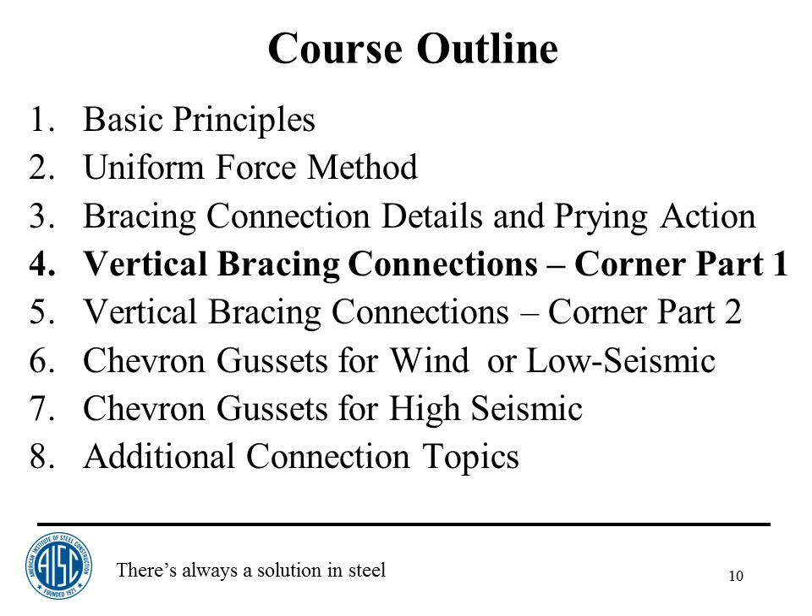So this is just the title, Bracing Connections and Related Topics. That's the title of the webinar. We're item 4 here, Vertical Bracing Connections, Corner Connections, Part 1, and tonight we'll do a vertical bracing connection in detail.

We'll begin with the brace to gusset design. This will determine the gusset dimensions based on the brace to gusset connection. Then we'll check the gusset to column connection, then the gusset to beam connection, and then the beam to column connection. So every one of these connections has got 4 separate connections that you need to deal with: brace to gusset, gusset to column, gusset to beam, and beam to column.

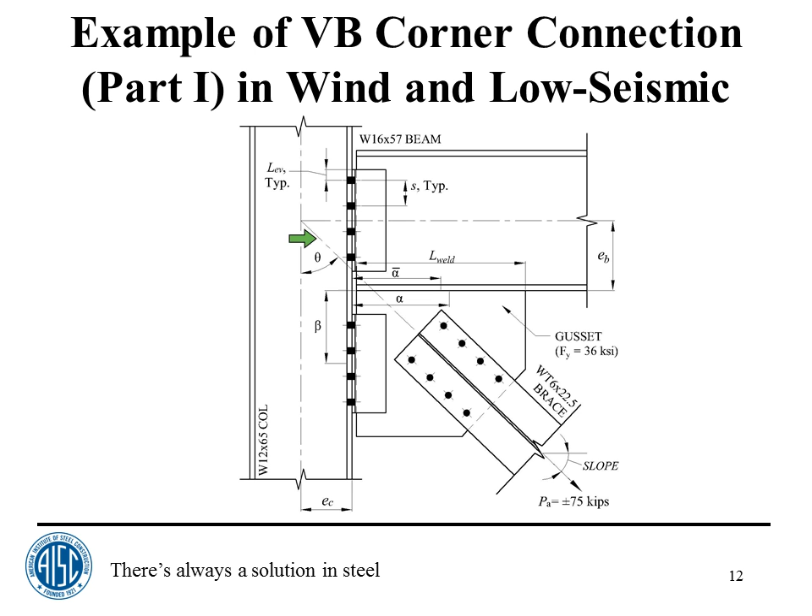Many of the limit states associated with these 4 connections are repeated. All of the limit states will be considered in this presentation, at least in the handout that you have, but we will not go through them all in detail because there's just not enough time in an hour and a half to really get through every one of them. You'll see the way we'll handle that as we go on.

This example you've seen before. I don't know whether it was the last session or the session before. We used it to do some calculations of the forces for the uniform force method. But this is the basic information. It's AISC 14th edition manual and specification. The example will be done in ASD terms. Next week we'll be doing an LRFD.

The beam to column and gusset to column connection have 4 rows of bolts, that's N equals 4. The weld length is prescribed, that's the horizontal weld length between the gusset and the beam, to be 20 inches with a 1/4 inch minimum. The bolts are A325N, threads excluded, standard holes, 3/4 inch diameter, unless noted otherwise. The angles, double angles, 4x4x3/8, grade 36, with horizontal short slots in the outstanding legs. And the edge distance, L sub EV, on the angles is 1 1/4 inches.

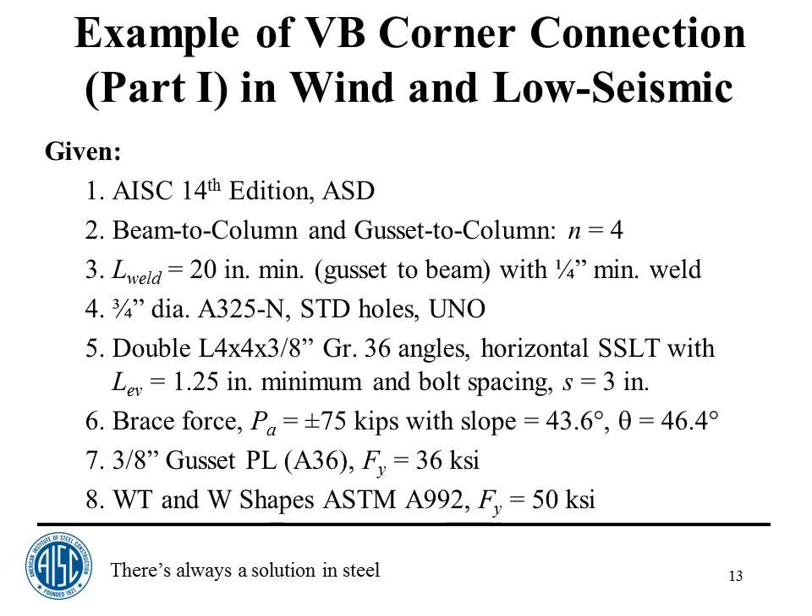The bolt spacing is 3 inches. The brace force is specified as plus or minus 75 kips. The slope is 43.6 degrees. The angle from the vertical used for the uniform force method is 46.4 degrees. The gusset is a 3/8 inch A36 plate, and the WT and W shapes, the column and the beam, are all ASTM A992 grade 50. So let's continue.

Each part of the connection that we deal with will be highlighted in yellow, as you see here. We'll begin the example by designing the brace to gusset connection. This will help to set the geometry of the gusset.

Determine the number of bolts required to attach the brace to the gusset. Check gross and net tension and block shear for the brace. Check bolt bearing and tear out of the brace and gusset. Check block shear and Whitmore tension and buckling for the gusset.

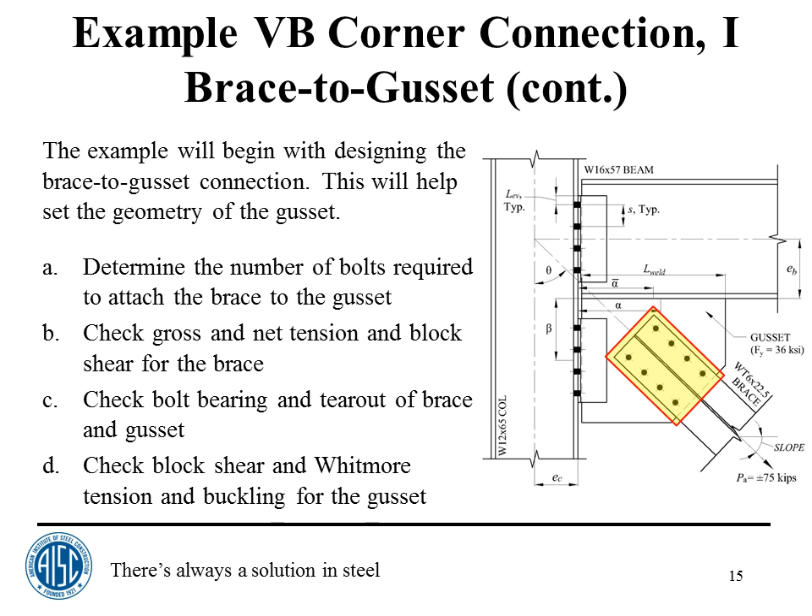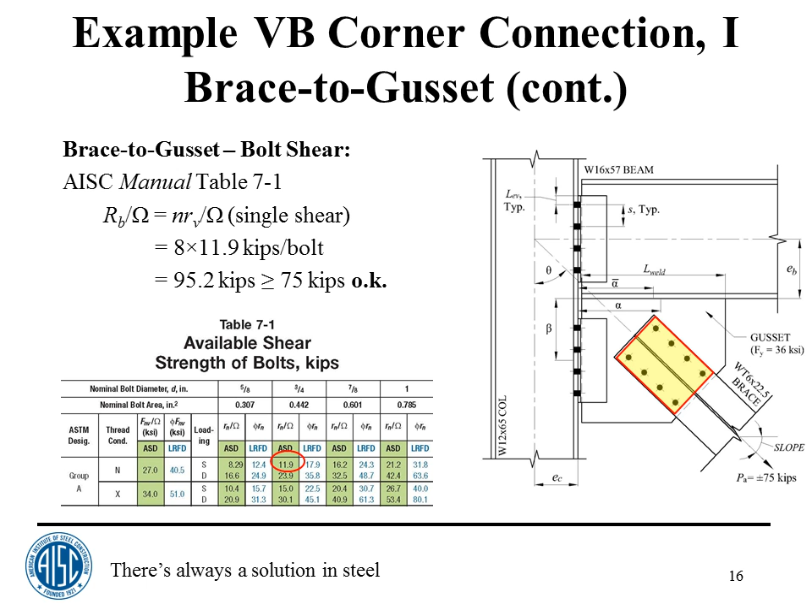Starting off with bolt shear, just to get an idea of where we are. The bolts are A325, 3/4 diameter, with a single shear value, ASD, of 11.9, as shown in Table 7-1. We have 8 of them, so 8 times 11.9 gives me 95.2 kips, greater than 75 kips, so we're okay. The connection will probably look like what we see here, though it might change a little in some cases. If tear out or block shear was an issue, you might have to space the bolts out more than the 3-inch spacing specified for this problem.

Brace to gusset. One of the first things usually checked is the gross tension of the WT 6x22.5. This really isn't the connection designer's responsibility, maybe, but I think it is, because if the brace is no good, then everything else we're doing is just spinning our wheels.

So let's check the WT gross tension, which is the tension area. The gross area is 6.56 square inches, the yield strength is 50, and the safety factor is 1.67, giving me 196 kips, greater than 75.

Okay, the next check would be net tension. Sometimes engineers pick these members without paying attention to how they're going to be connected. You're going to have some holes in this thing, which reduces the tensile strength, and there are also shear lag effects, because not all elements of this WT will be connected—the stem will be sticking up in the air with no connection to it. The width of the holes is taken as 1/16 greater than the nominal dimension for these net tension calculations.

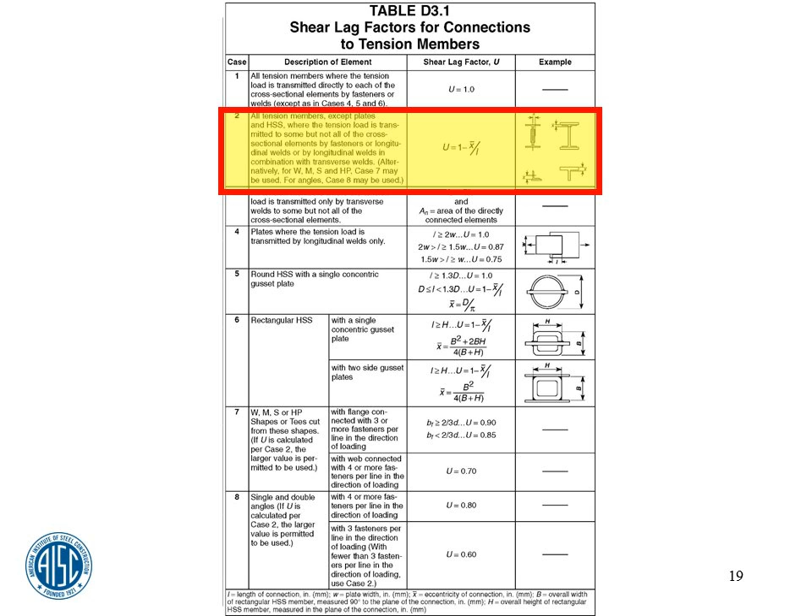The shear lag factor is from Table D3.1. We're looking at case 2 here: all tension members except plates and HSS, etc., where the load is transmitted to some but not all of the cross section.

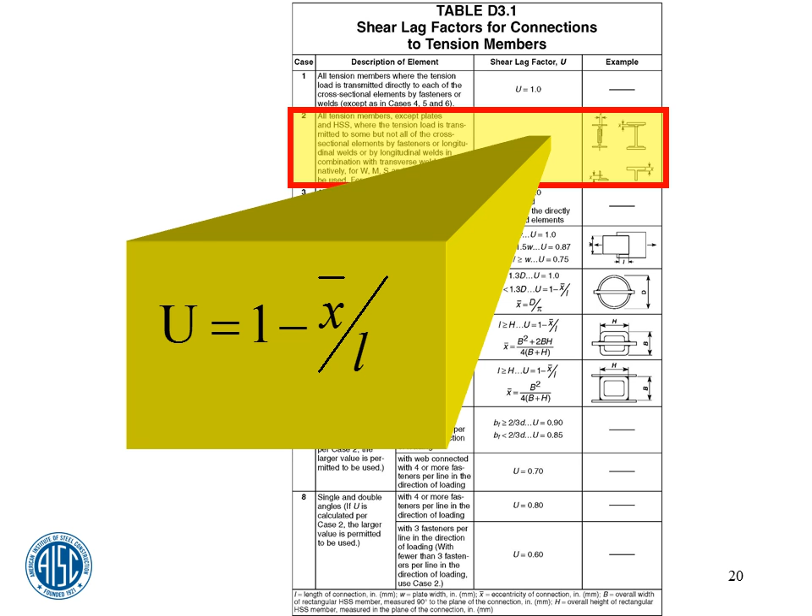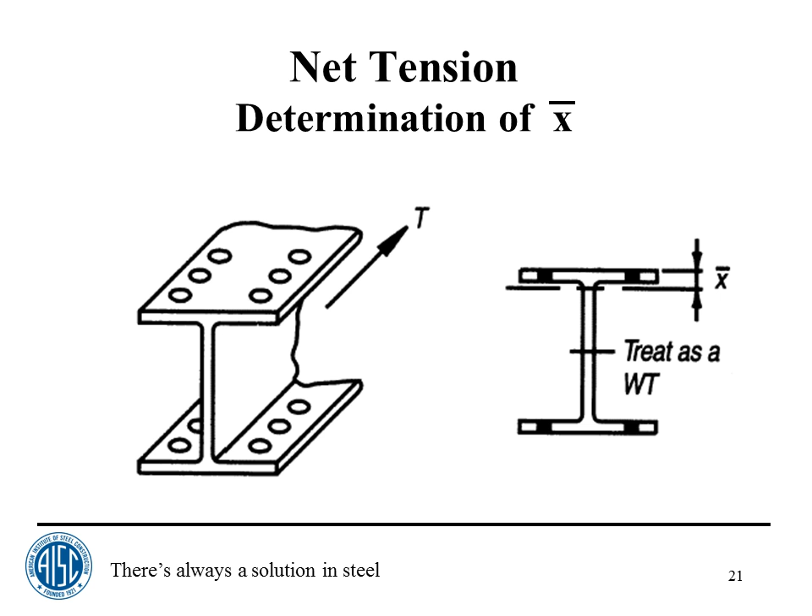The formula we have for this is shear lag factor U equals 1 minus x bar over L. What are those terms? X bar is the distance from the faying surface—here, for our connection—to the gravity axis of the brace. If you have a wide flange connected to the flanges and not the web, x bar would be the gravity axis position of a WT cut from that wide flange, which is exactly what we have here. So we can look this number up in the tables in Part 1 of the manual, and x bar is 1.13.

The length of the connection out to out of the bolts is 9 inches. So U equals 1 minus x bar over L, which is 1 minus 1.13 inches over 9 inches, giving me 0.874.

To simplify the calculations, instead of repeating a whole diameter plus 1/16 all over the place, in a lot of the calcs what you'll see is 13/16 plus 1/16 gives 7/8. The section we're looking at is shown here by the red line—what happens right along this section of the WT where the holes are.

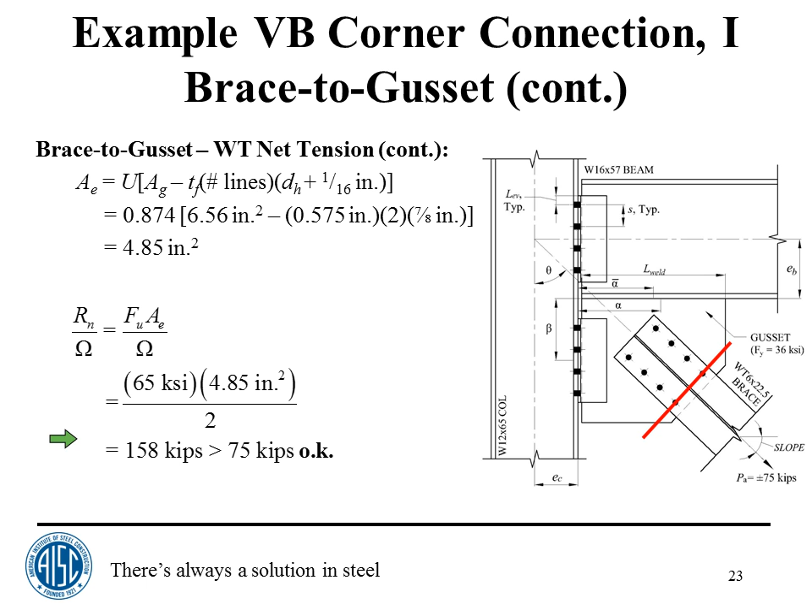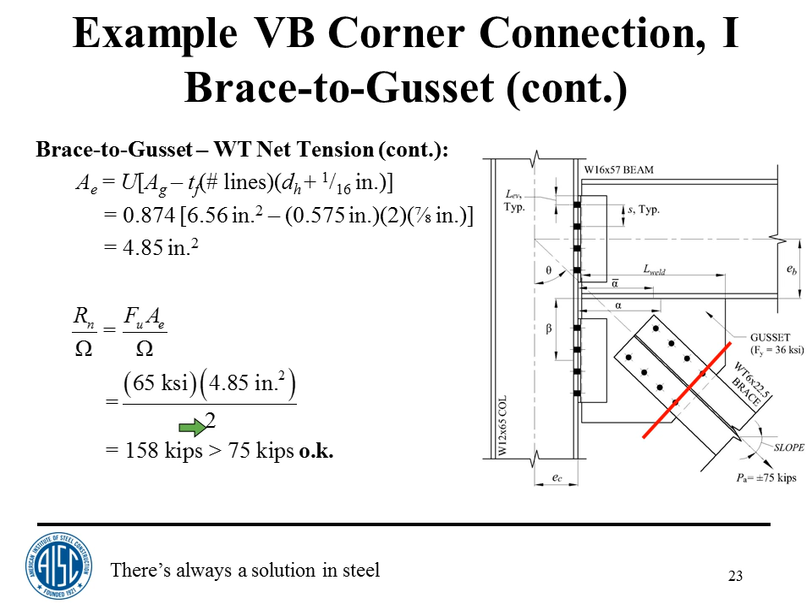So the effective net area, A sub E, is the shear lag factor times the net area. The net area is the gross area minus the area of the holes. The thickness of the flange of the WT is 0.575, there are two holes, and the size of the hole is 7/8. Subtracting that out from the gross area gives an effective net area using the U factor of 4.85. So the tensile strength, F sub U times A sub E—the rupture or fracture strength—65 times the effective net area divided by the safety factor of 2 gives me 158, greater than 75.

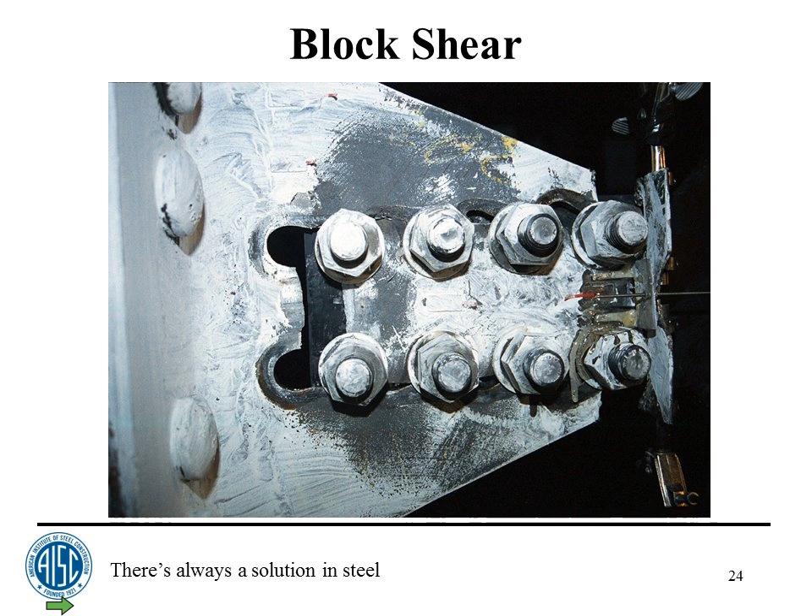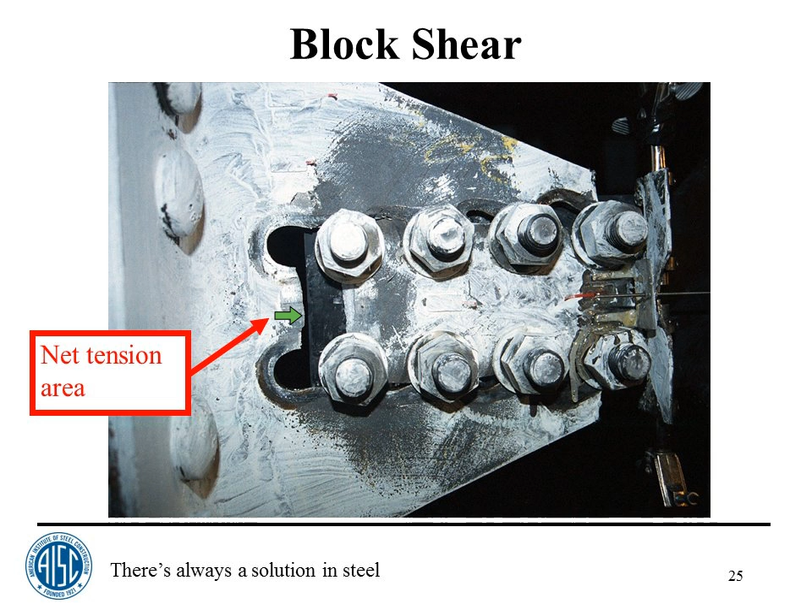Okay, the next set of slides has to do with block shear. This picture shows a pretty graphic block shear failure. There are two failure surfaces for block shear: you've got the net tension area between the bolts in tension, and you've got a shear area along the bolts—there are two of them, one up here and one down here.

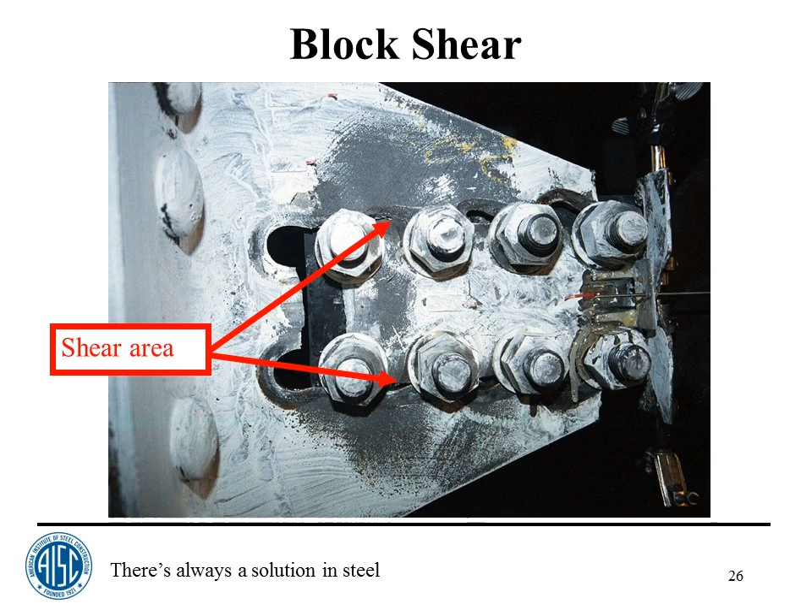The UBS factor is a factor that you can find in the spec. Basically, it's 1 for everything we'll be doing here tonight. The commentary and the spec says it's 0.5 if you had, say, a double column of bolts like a clip angle with two columns of bolts. Something like that would be 0.5, but it'll be 1 for everything we're doing.

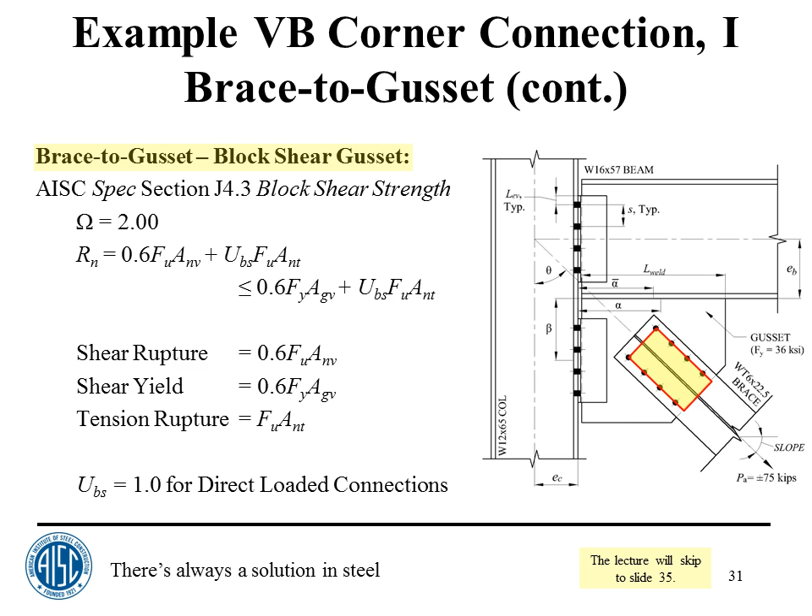All the calculations are given here, but the lecture will skip to slide 35. The reason we're skipping that is we don't have time to go through it all again, and there's nothing new. All of the calcs that we just skipped, you can look at yourself and see that they're exactly the same as what we already did for block shear for the WT. The failure mode is a little bit different, but it's basically the same idea.

The next thing that I want to talk about is bolt tear out and bolt bearing. And these, although they're listed in the specification as bearing, they're really quite different limit states. I believe that in the next edition of the specification, they will be broken out to be tear out and bearing as separate entities.

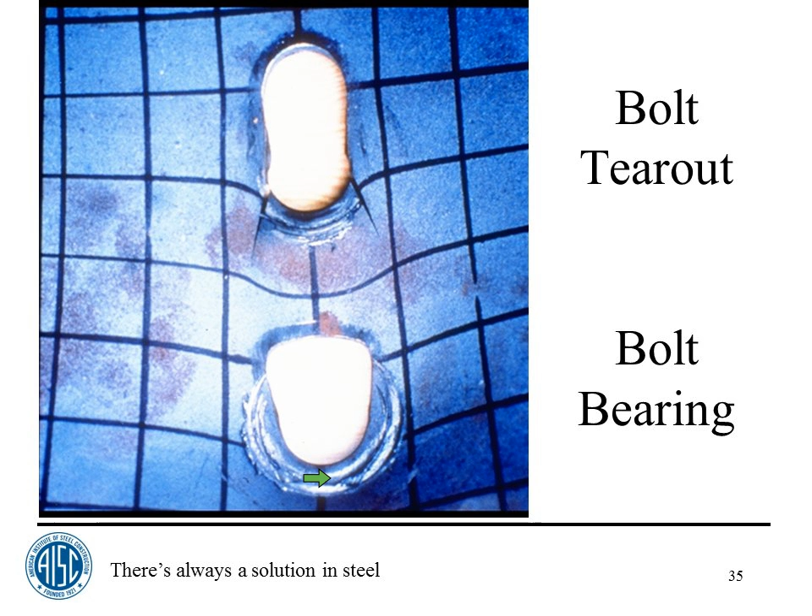You can see for tear out, you kind of get some sort of a rupture or fracture taking place, whereas for bearing, you get kind of a mud wave in front of the bolt. You get a lot of yielding. Here you're getting something that's going to ultimately fracture. It's going to pull a piece out.

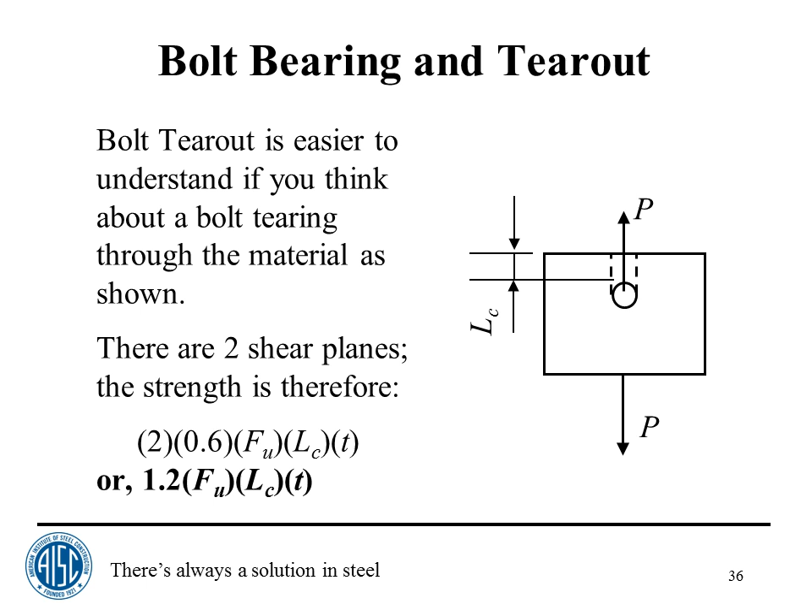Continuing, in reality, the tests that were done to establish this formula, some of the tests failed like you see here, but the formula in the specification, it says here - it's actually in the specification itself - is pretty accurately predicted by the 1.2 formula.

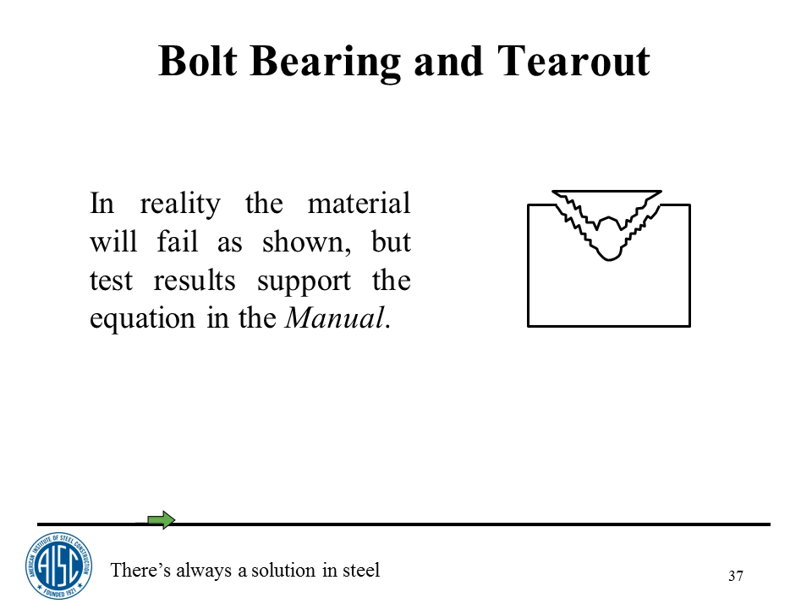So we already checked bolt shear, 11.9 kips per bolt. We had 8 bolts, and we came up with about 95.2 kips capacity. But that might not be the right number, because bolt shear is only one of 5 limit states that need to be checked for each bolt.

And those limit states are bolt shear, which we already checked, then bolt bearing on the main material, bolt bearing on the connection material, bolt tear out on the main material, and bolt tear out on the connection material. And then for each bolt, the smallest of these 5 is added up to get the capacity of the connection, the design strength of the connection.

So let's look at how this works. For bolt shear, we've already done that. We know that for bolt shear, it's 11.9 kips per bolt. So let's look at bolt bearing.

This is for the main material, for the WT. It's 2.4 times the diameter of the bolt times the thickness of the flange times F sub U, 65, divided by the safety factor 2, gives me 33.6.

Then bolt tear out for an edge. The edge is this one right here. This is L sub C, the clear distance from the center of a hole - from the edge of the hole to the edge of the plate. So it's 1.5, that's the edge distance, minus half of a hole diameter. And for this calculation, we don't use the hole diameter plus a 16th. The actual physical tests were done with, and the theory was presented with, the hole diameter, so it's 13/16.

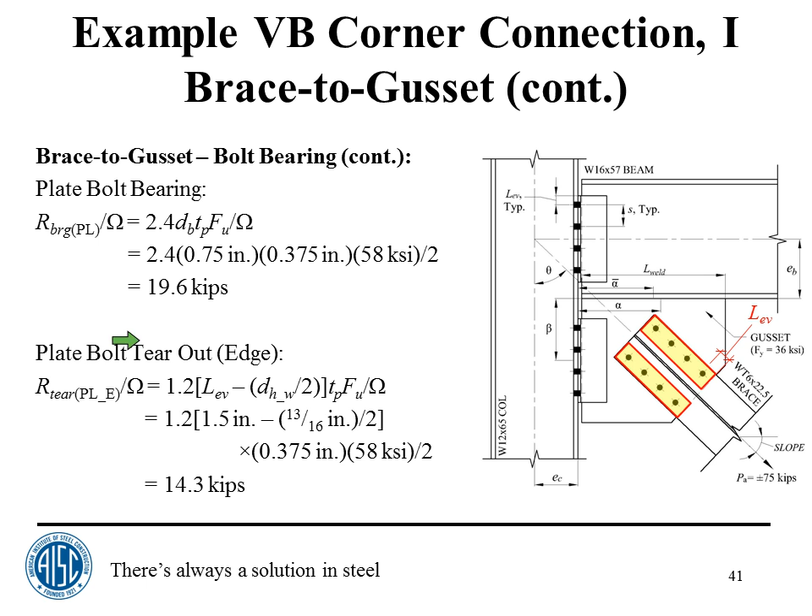Then plate bolt tear out for an edge bolt. That's this one down here. We have, again, 1.5 minus half a hole, 13/16 over 2. And then we'd have the thickness of the gusset. We'd have 58, the tensile strength of the gusset. Safety factor, 2, gives me 14.3.

Now, none of these yet have gotten down to 11.9, so we're still okay.

Continuing, plate tear out. This is the gusset plate. So the center bolts, like in here somewhere, we would have 3 minus 1 hole, gives me 28.6.

And then for the top bolt, for each bolt we would now summarize the 5 values that we have. We've got all these bearings and tear outs: bearing on the main material, tear out on the main material, bearing on the connection material, tear out on the connection material, and bolt shear. Well, it turns out, in this case, it's 11.9, which is where we started.

And then for each of the other bolts, this is for the center bolts, calculating, taking the minimum of the 5 values - again, the least is going to be 11.9. And then for the bottom bolt, taking the least of all these values, again, it's 11.9. And so you would end up, of course, with where we started: 11.9 is the value, but it might not be that way.

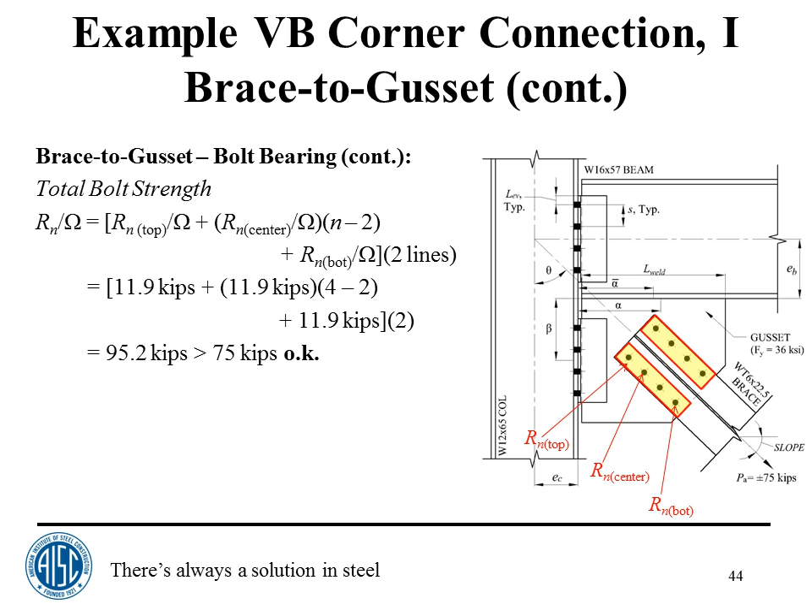You've got bolt bearing for the main and the connection. You've got bolt tear outs for the main and the connection, and for tear out, you've got different values depending upon center bolts or edge bolts, and then you've got bolt shear. The least value of those 5 for each bolt, added up, gives you the capacity of the connection. This particular example doesn't demonstrate that, but that's what you have to do in general.

The next set of slides has got to do with the Whitmore section. The Whitmore section was first introduced in the bolt guide, which the bolt that I mentioned, I think 2 sessions back, by Kulak, Fisher, and Struik, first published in 1974.

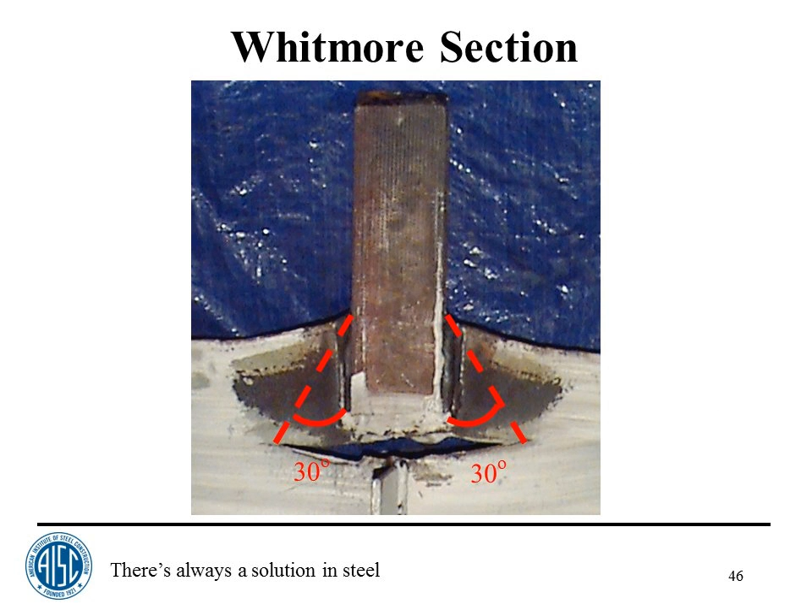The Whitmore section was actually developed at the University of Tennessee in 1952. It wasn't used, as far as I know, at all until the bolt guide book came out in '74, and its second edition in '87.

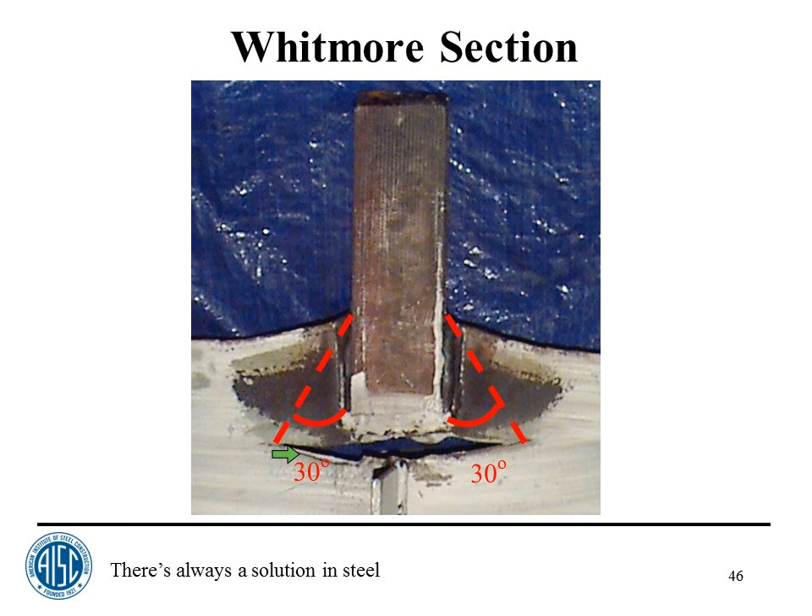Anyway, what Whitmore came up with was that from the beginning of a connection to the end of a connection, if you spread the load at 30 degrees each side, you get pretty darn close to calculating what the stress is on a section of your plate. This one went to the limit, it fractured, but you can see that it's pretty darn close to being 30 degrees each way.

The length of the Whitmore is the gauge, which is 5.5, plus the tangent of 30, times 9. 9 is the distance out to out of the bolt. And there's two of those, which gives me 15.9 inches for the Whitmore section, the length of the Whitmore section. Sometimes the Whitmore section will go into the beam. In this case, it does not.

There's a general discussion of the Whitmore section in Modern Steel Construction, written by Carlo Lini of AISC and myself, published I think in about 2012, which gives you all of the kind of details that you need to consider it in general.

So, in this particular case, the length of the Whitmore is in the gusset, it's 15.9. The buckling factor, the K factor, is 0.5 from tests that were done by John Gross at NIST. It's the value that's used in all the AISC's design examples in Volume 14.1.

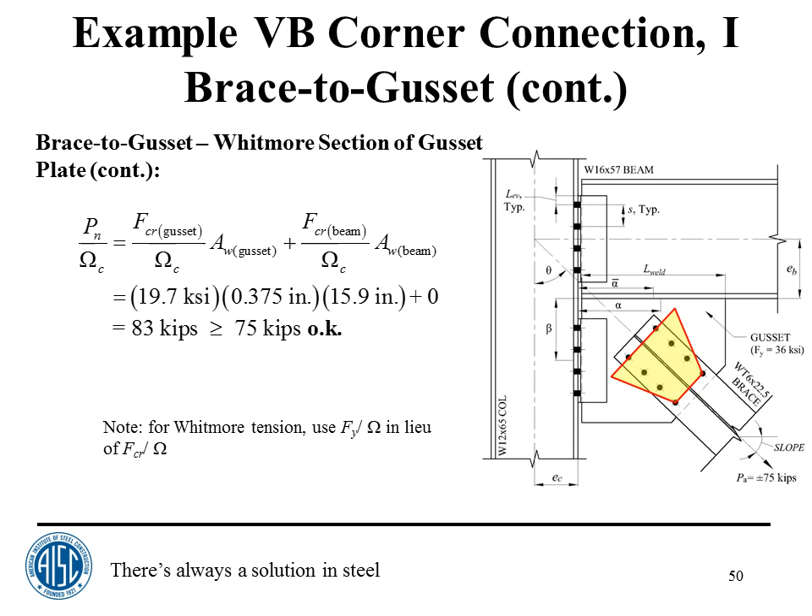You could also check Whitmore tension, but for Whitmore tension, this 19.7 will be about 21.6. So it's not going to control. I don't think it ever controls, but if you have a connection where KL over R is less than 25, basically you would just be checking yield anyway.

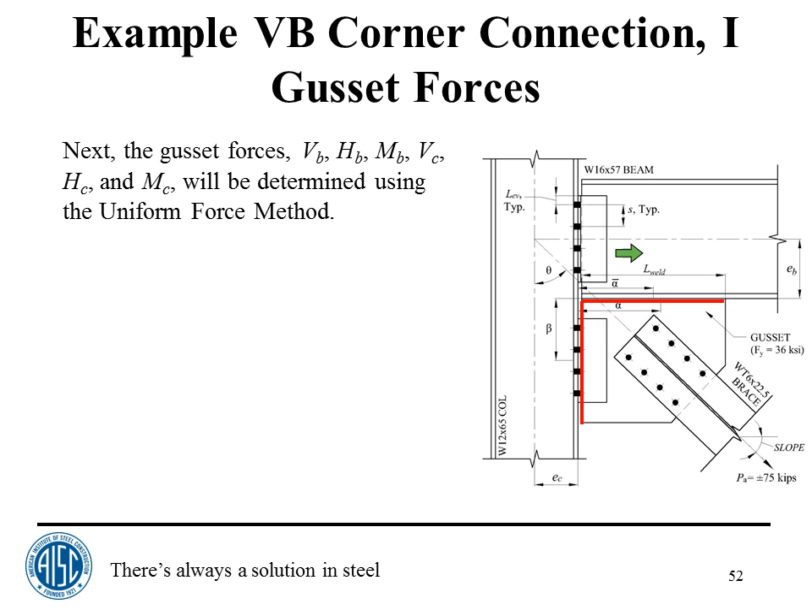All right, the next part of this presentation is to calculate the forces that act on the gusset interfaces, which are shown here in red - gusset to beam, gusset to column. We'll use the uniform force method to do this. We've already done this in an earlier presentation.

Alpha is the distance from the face of the column flange to the ideal centroid of the gusset to beam connection. Ideal in the sense that if we put the centroid of the connection right there, we'll have no couple on this edge. Beta is the counterpart for the gusset to column connection.

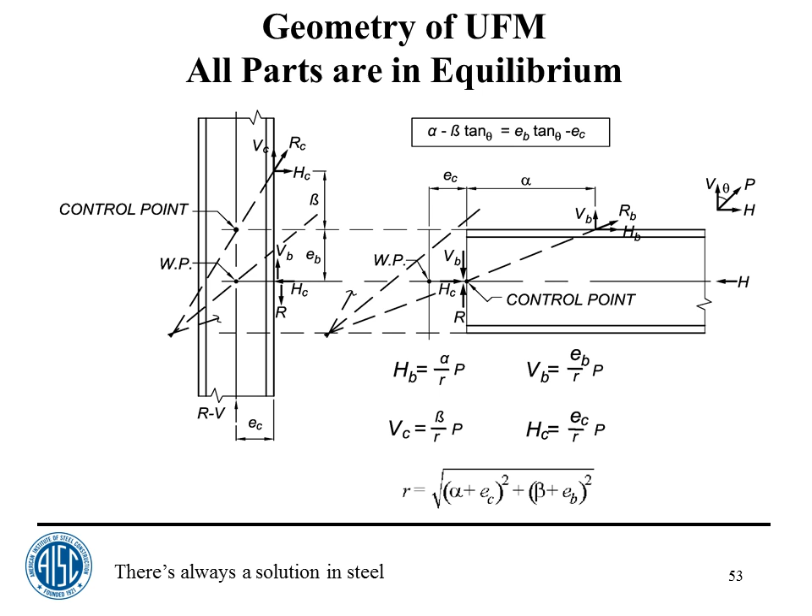Beta is the distance from the top flange of the beam in this case - could be the bottom flange if it was a bottom gusset - to the centroid of the ideal position of the gusset to column connection. Ideal in the sense that if we satisfy this constraint with alpha and beta, there are no couples here either, no couples at the gusset to beam connection, and no couples at the beam to column connection. So you have pure uniform forces on every interface.

Continuing with the UFM, the tangent of the angle theta from the vertical is the tangent of 46.4, which is 1.05. E sub B is half the depth of the beam, which is 8.2. E sub C is half the depth of the column, 6.05. Note that E sub C would be 0 in connections into a column web, except for special case 4, which was introduced a couple of sessions ago.

So let's continue with it. Beta bar - what's the difference between beta and beta bar? There have been some questions about this sort of thing. Beta bar is the actual distance to the centroid of the gusset to column connection.

From the geometric layout, the horizontal dimension - actually it's the vertical dimension of the gusset - is 16 7/8 inches. That's this distance right here, from here to there. And we will place the gusset to column connection right dead center on that. So we'll pick beta bar as 8.5 inches. Beta bar is 8.5 inches. That's the centroid of the connection of the gusset to the column. Let's also pick beta, the ideal location, to be exactly beta bar.

Then, using the constraint, we can calculate the ideal position for alpha. And that turns out to be, from the geometry here, 11.5 inches.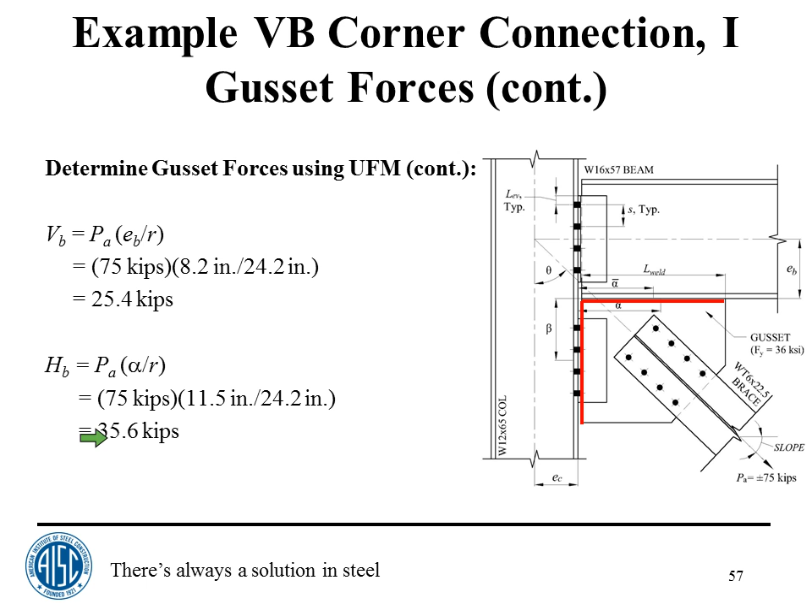The shear between the gusset and the beam is 35.6. You have to remember what all these definitions were—I don't have time to go through the whole thing again. M sub B is the moment on the horizontal edge, and here you see V sub B and H sub B. V sub B times the difference between alpha and alpha bar, which is 1 inch, gives me a couple of 25.4 kip-inches. V sub C, the vertical component between gusset and column, is 26.3.

And H sub C, the horizontal component between gusset and column, is 18.8. There's a note that H sub C would be 0 for connections to a column web, except for special case 4. Why is that? Because for a column web, E sub C would be 0, and so H sub C would be 0, except for this special case. M sub C—in this case there could be a couple on this edge if alpha, beta, and beta bar were not the same, just like we have here, calculated by taking H sub C times the difference between beta and beta bar, just as we did with V sub B and alpha bar. This is the normal component to this surface, and H sub C is the normal component to this surface. So it would be H sub C times the quantity beta minus beta bar, if beta wasn't equal to beta bar. So I could have couples on both edges.

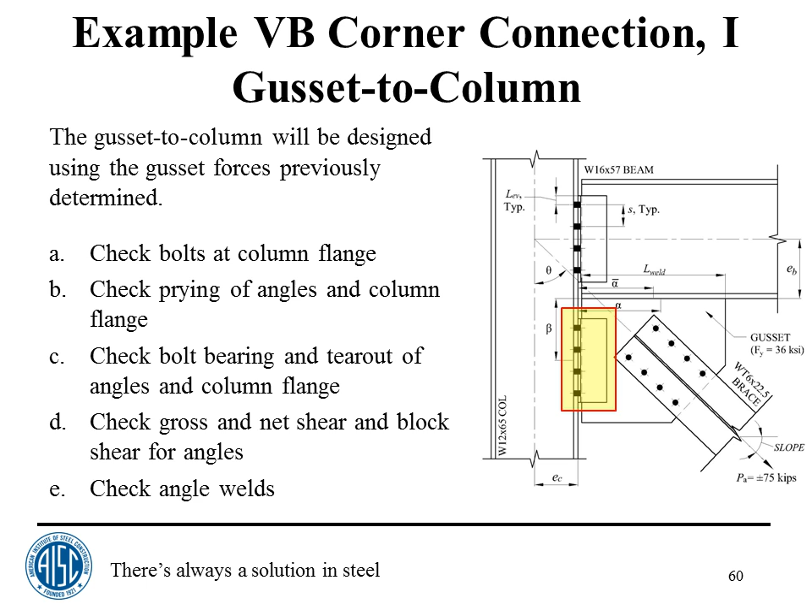Continuing, we'll look at the bolts here. Remember, the bolts had a bolt shear capacity, a design strength of 11.9, and there are 8 of them. So again, we have 95.2, greater than the vertical component we're dealing with, gusset to column, 26.3.

The thing that's different here is that we've got both shear and tension on these bolts, as we did last week in the prying action formulation, and that's why I did that. The most interesting case is really where you've got shear and tension on these bolts.

So what's the shear per bolt? Called V sub bolt, it's the total shear divided by the number of bolts—that's 3.29. What's the total tension per bolt? The required strength in tension per bolt is H sub C, the total tension divided by the number of bolts, which is 2.35.

The area of a bolt, 3/4 diameter, is 0.442. Therefore the shear stress per bolt we need for the interaction equation, little f sub RV, is the shear per bolt divided by the area of the bolt, which gives 7.44 KSI. The next slide will show the interaction equation, which you saw last time in some detail.

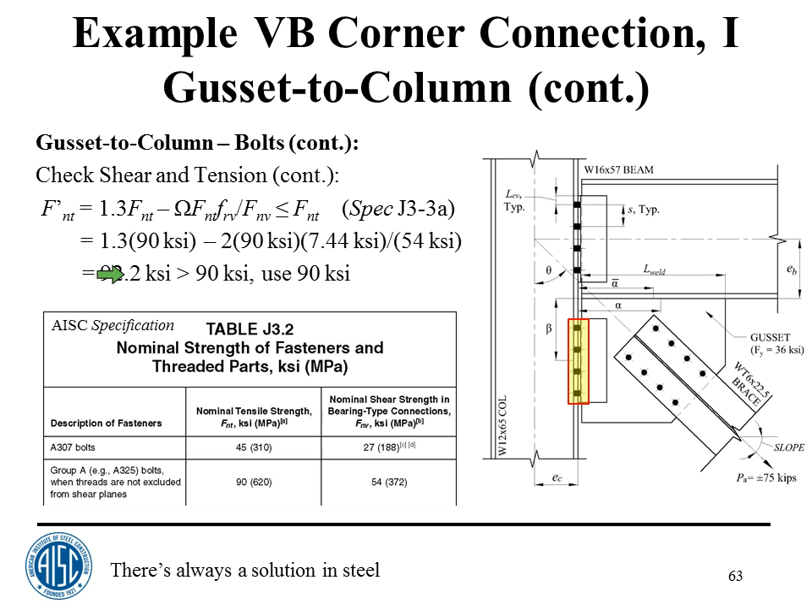If you calculate all of this, you come out with F prime NT equal to 92.2, which is greater than 90, which is impossible. We can't exceed 90, so we use 90. I mean, it's possible for it to exceed, but for design purposes we can't use more than 90. All this really means is that the shear stress on the bolt is so small that really it doesn't affect the tensile strength interaction-wise.

So what's the reduced tensile strength of the bolt? It's F prime sub NT times the area of the bolt divided by the safety factor. That reduced tensile strength wasn't reduced at all. It was 90. So we're right back to the 19.9 that we had before, greater than 2.35, we're okay for the bolt.

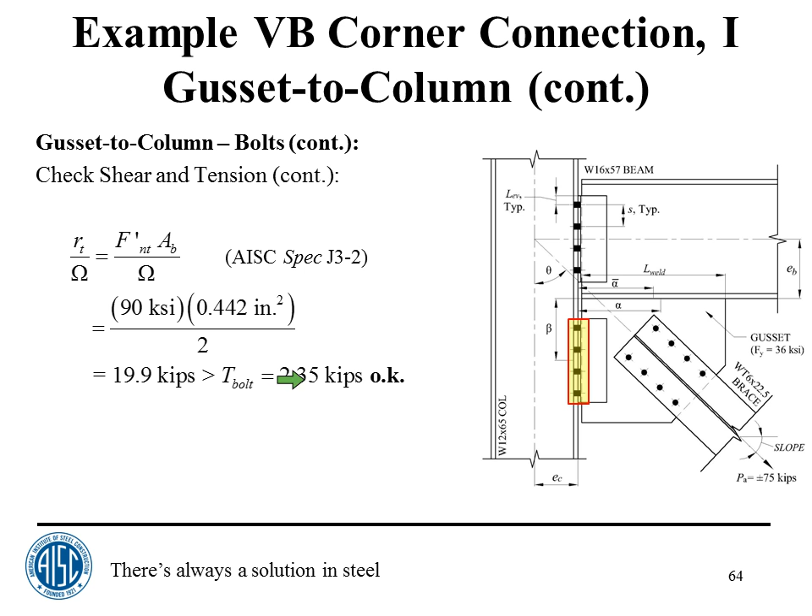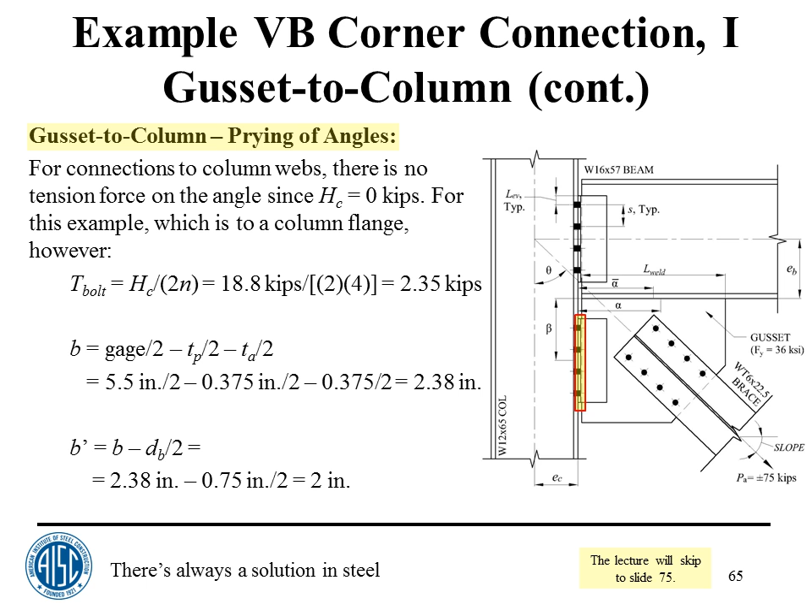So the next set of slides has to do with prying. Whenever the lead-in for the limit state is shown in yellow here, it's one that I am not going to go through in detail again because we've done it either here or in a previous session. So we are going to skip, as it says in the bottom right-hand corner, to slide 75. Between 65 and 74, you've got all the calculations you need to check that yourself.

There's a lot of homework to be done here if you really want to go through this stuff. Do you care? Well, I hope so. I mean somebody's got to do these calcs. If you think you can come up with a better way to do it, I'd like to know about it. But it's very tedious, there's no question about it.

Now this is prying on the column side, which we didn't do last week because we didn't have a column. All we did was talk about the double angle side, but I did say you need to look at both sides. So here we're looking at the other side. Now the column is continuous, so it would really be very conservative to say that the tributary length per bolt, the P here, is the spacing of 3 inches, because I've got all this extra yield line that I can develop. So this is just a way to come up with an effective P.

Tributary length per bolt. This comes from this book, Handbook of Steel Connection Design and Detail, 2nd edition. The formula is given there. It was originally developed by Mann and Morris way back in the 70s, published in the ASCE Journal of the Structural Division in March of 1979. Note that we have an A bar and a B bar. A bar is the distance from the center of the hole to the toe of the flange of the column. B bar is from the center of the hole to the face of the web of the column.

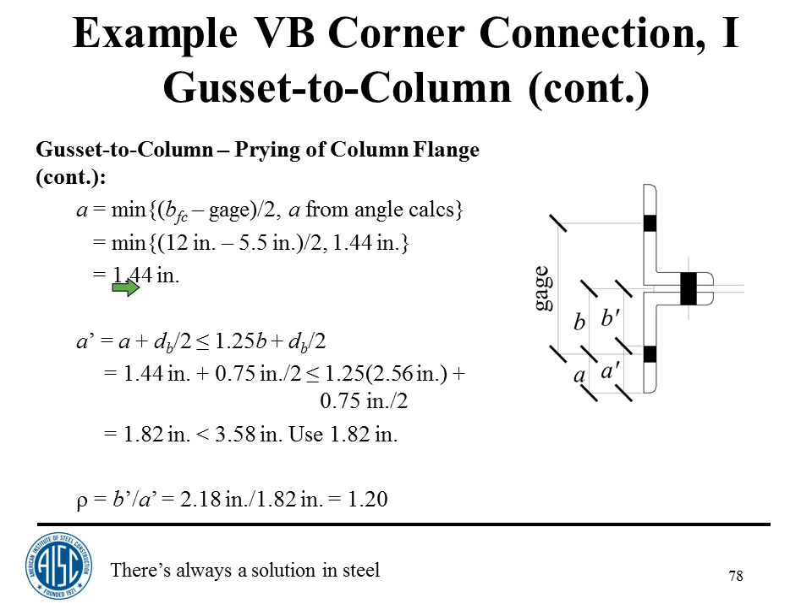A is a little bit different. What we've got here is A bar, that's the width of the column flange minus the gauge over 2. That came out to be a pretty big number. A from the angles, for the other side, would have been 1.44. So you have to use the smaller of the two, because the column flange is way out here someplace, and the A for that is way out here someplace.

But you can't have any prying out there. You have to have prying at the smaller A. Right at this point is where the little Q force is going to work. So A prime is the same A that we would have for the angles, 1.44 plus half a bolt diameter. This is just the check that A can't exceed 1 1/4 times B. So we get A prime and B prime, and we get rho, the ratio, 1.20.

Maybe I'm going a little bit too fast, but you've got all these slides in front of you. We've done this all before. The thing that's different here is that we're looking at the A bar from the column, and comparing it to the A from the angles.

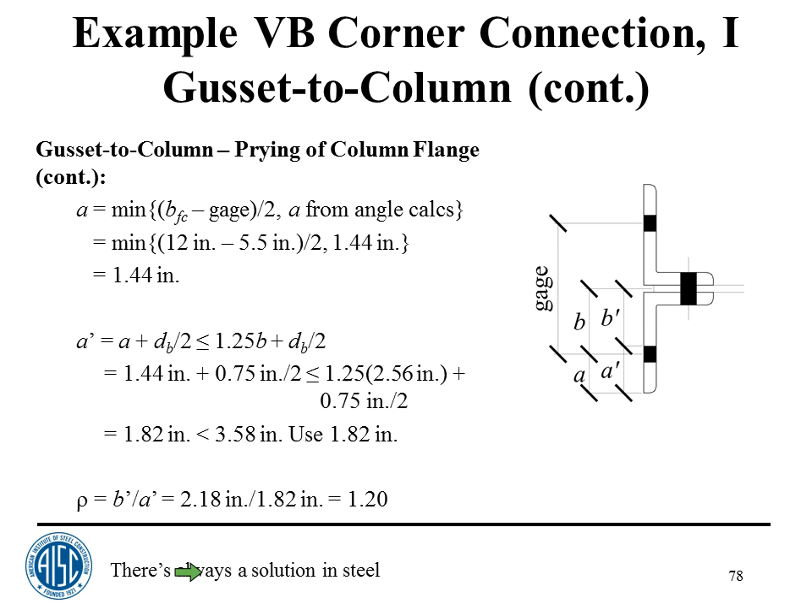So we have all the dimensions we need to continue with prying action. P equals P effective, 5.88. Delta is 1 minus the size of the diameter of the hole divided by P, which is 13/16 over 5.88.

Subtract that from 1. T sub C, in ASD terms, we have an omega in the numerator instead of a phi in the denominator, but everything else is the same: 4 times B times B prime over P times F sub U. The B here is in ASD terms rather than LRFD terms, which was 19.9. But T sub C will be exactly the same whether you do this in LRFD or ASD. It'll be 8.71.

This says greater than the thickness of the flange. Yeah, that's true, but that really doesn't mean anything. All we know is that as long as we've got this value, 8.71, we could develop the strength of the bolt. We could develop 19.9. We don't have 19.9. We've only got 2.35.

So continuing, alpha prime, we know exactly what that is. It comes out to be between 0 and 1 in this case. 0.565 is greater than 0, less than 1. So we would use manual

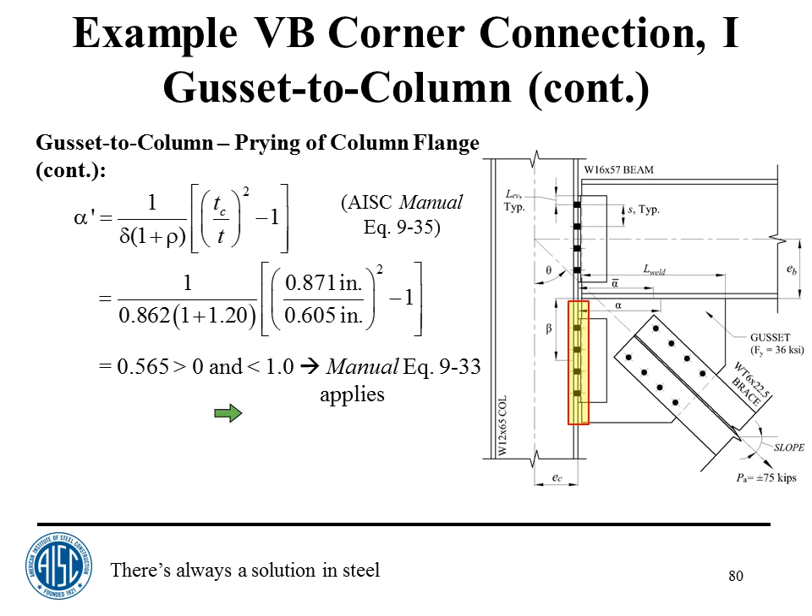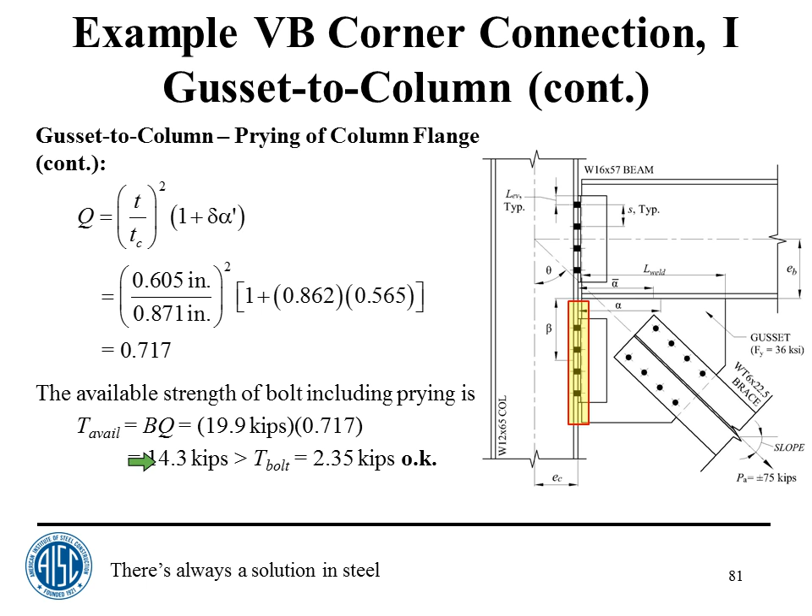equation 933, which is basically this equation here. T over T sub C squared, 1 plus delta alpha prime, gives me a Q, capital Q, of 0.717. T available is simply the bolt available tensile strength multiplied by this Q factor. 19.9 times 0.717 gives me 14.3, greater than 2.35. We are okay.

Next here is gusset to column bolt bearing. Again, the heading for this particular limit state is highlighted in yellow, meaning we have considered this before. We will not consider it again, but all the slides you need to do it yourselves are presented here, and we will go to slide 87.

Slide 87, we're still in the gusset to column connection. We haven't checked angle gross shear, shown here by this red line. What's the gross shear of the angle? It's the length of the angle, 11.5 inches, the depth of the angle, times the thickness of the angle, which was 3/8 of an inch, times the shear yield strength of the angle, 0.6 times 36, divided by the safety factor, 1.5 for shear yielding.

There should be a 2 in the numerator of this expression, because there are two angles, one near side, one far side. That 2 is actually included in the calculated value of 124, greater than 26.3. We're okay.

We need to check angle net shear, shown here by the red. It's basically the depth of the angle, which is 11.5. Take out the holes. The holes are 13/16 plus a 16th, 7/8. So we've got 4 times 7/8. Take that from 11.5 and we get 8. That's the length, the effective length.

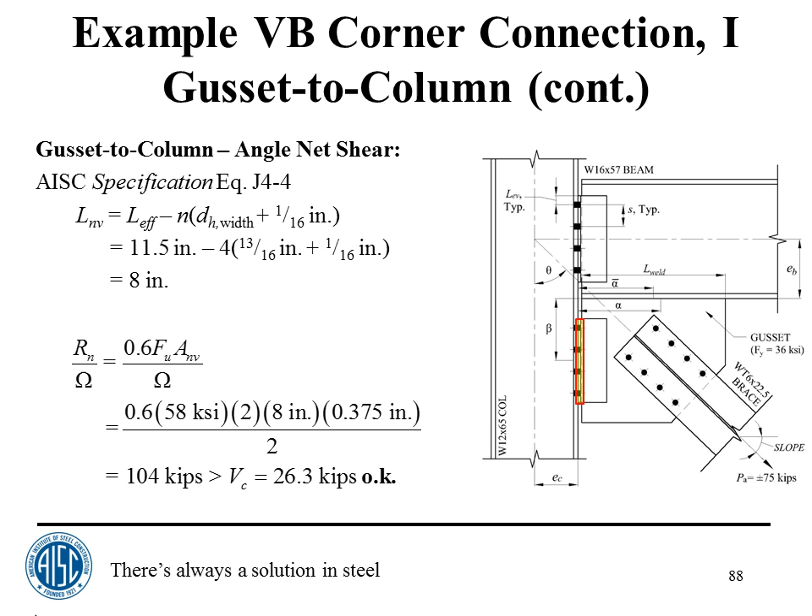Again, here we are with block shear in the angles. We have already done that. You see this formula here from section J4.3. We've already done this earlier tonight, I think. No, I don't think we have, but we've done it tonight, so we will skip that here. All the calcs you need are given in the slides between here and 94, but we'll skip to slide 94.

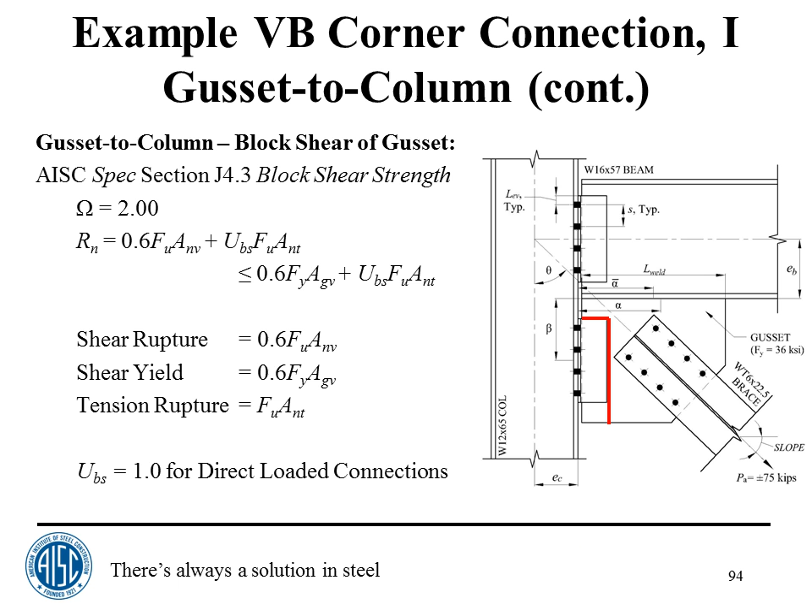I hope you're not being disconcerted by this, but we are trying to get through the whole thing, and we will not make it if we have to do every one of these limit states. This is very time-consuming stuff. That's why most times when you see this presented, people just say, we're going to treat block shear, here's the answer. But if you really go through it, these slides treat every limit state in complete detail. But there's not enough time in an hour and a half to go through every one of them in detail.

So we're going to look at block shear in the gusset. The reason we're going to do that is for two things: we're looking at block shear here where there are no holes, and we're looking at two block shears. There's a block shear for shear, and there's a block shear for the axial force here.

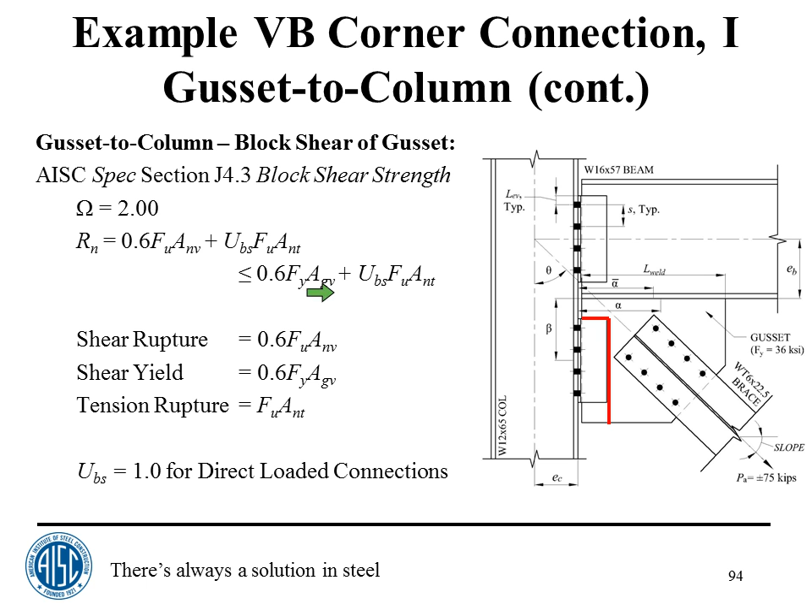This is the basic equation that we have here. We're going to be looking at this red section that you see here. The first thing that we're going to check is block shear for shear. Maybe that sounds like a tautology, but we've got a vertical component on this connection, which is V sub C, and we need to make sure that this piece of the gusset doesn't tear out on us. So for the shear check, this is block shear of the gusset for shear.

The gross shear length is this length that you see here, from the top of the angle all the way to the bottom of the gusset. That's 14¼ inches. And the gross tension length is K, which is the horizontal length of the weld right here. It's the length of the leg minus the setback. And the net values are exactly the same as the gross because there are no holes.

So calculating the areas, the gross shear area is 5.34, and the net shear area is 5.34 because there are no holes, and the net tensile area is 1.31.

So calculating block shear for this, we have shear fracture times the net shear area, which is 185, and we have gross shear yielding. Again, since there's no holes, the net and the gross are the same, but these values are different because this is yielding rather than fracture, 115. And then we have tension fracture, which is on this surface right here. That's 58 times the tension net area, which is actually the tension gross area since there are no holes. That gives me about 76 plus 115 gives me 191. Divided by the safety factor gives me 96.

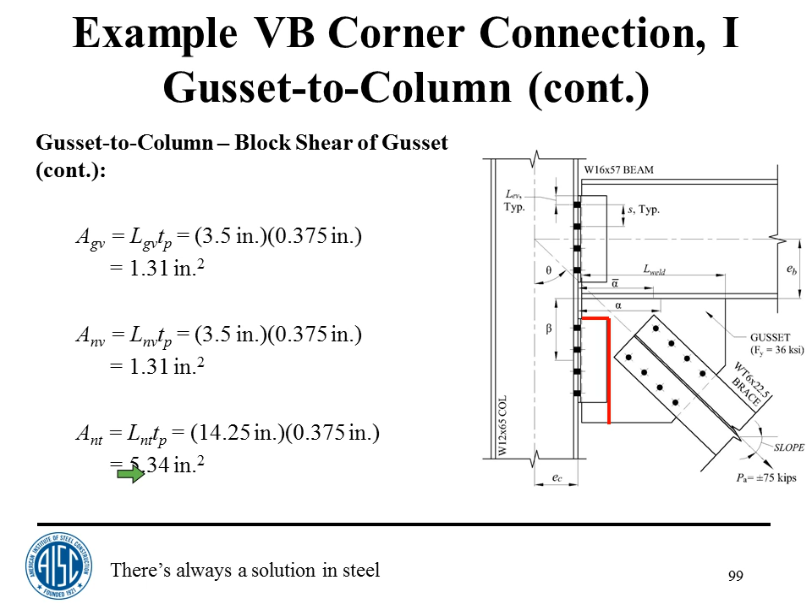So calculating all these values again, this is shear fracture, 45. This is shear yield, 28. This is tension fracture, 310, plus the smaller of these two, which is 28, gives me 338, divided by the safety factor gives me 169. So we've got these two limit states occurring simultaneously on the same surfaces.

So it might occur to you that perhaps interaction should be considered on this. And the design manual, in a few places, the worked-out examples consider a sum of squares kind of interaction. This is the required shear strength, this is the available shear strength, this is the required axial strength, this is the available axial strength. All these numbers we've just calculated - take the ratios, square them, and add them up, you get 0.09, which seems like, what are we bothering doing this for? But this limit state can be very critical, especially in seismic connections where you've got fairly high loads. For this particular connection, though, the loads are pretty light.

Okay, next is the weld size. We're going to calculate this weld size right here, which is pretty basic stuff. It's a C-shaped weld. We have manual tables in Part 8 that allow us to do that.

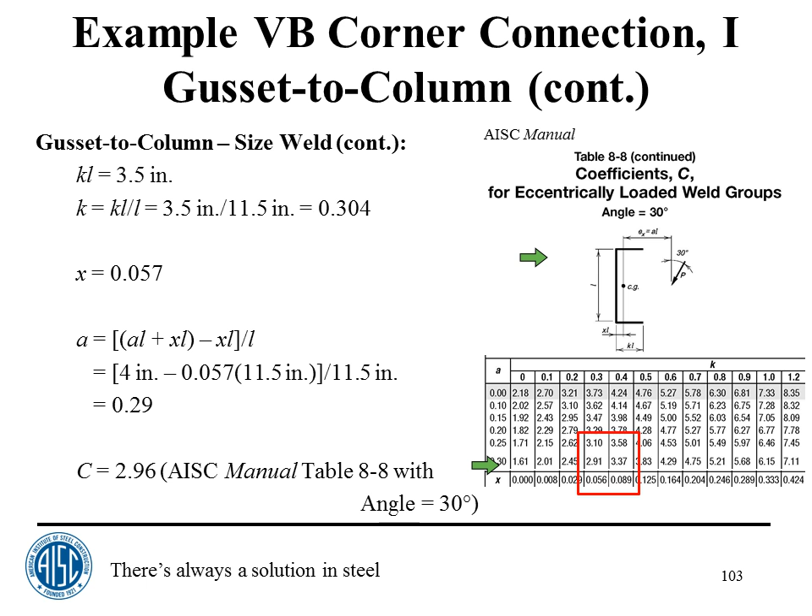Why 30 degrees? Because our angle actually was 35.6, and we can't interpolate in these tables according to the manual. You have to go to the next smaller angle.

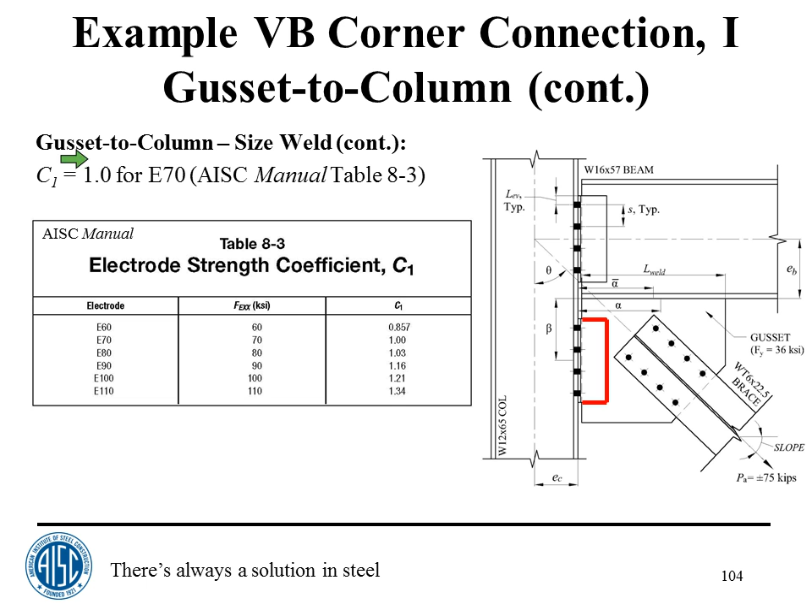So calculating the required weld size, this coefficient C1 is something that's almost always 1. It's 1 for E70 electrodes. If you use some other electrodes, it's another number. But in the 30-odd years I've been involved in this, I've never used anything but E70 electrodes. But if you have to, you've got table 8-3 to do that.

Then the formula for D min is given here as the resultant force multiplied by the safety factor, divided by C, C1, and L. The 2 here is because there are 2 welds—one near side of the gusset, one far side of the gusset.

So 32.3 is the resultant force. This 2 here is the safety factor. This 2 here is the 2 because there are 2 welds. This is the C factor. This is the C1 factor. This is the length, 11.5, which gives me 0.949 16ths, less than 4, so I'm okay.

Remember, we specified a 1/4-inch fillet weld here. T-min, you can calculate by all of this, which is basically setting the fracture strength of the weld equal to the shear fracture strength of the gusset, which you see right in here. That would give you 0.101.

This should be the other way, right? This is just to see if you're awake. 0.101 is less than 3/8, you're okay. All of this is manual equation 9-3.

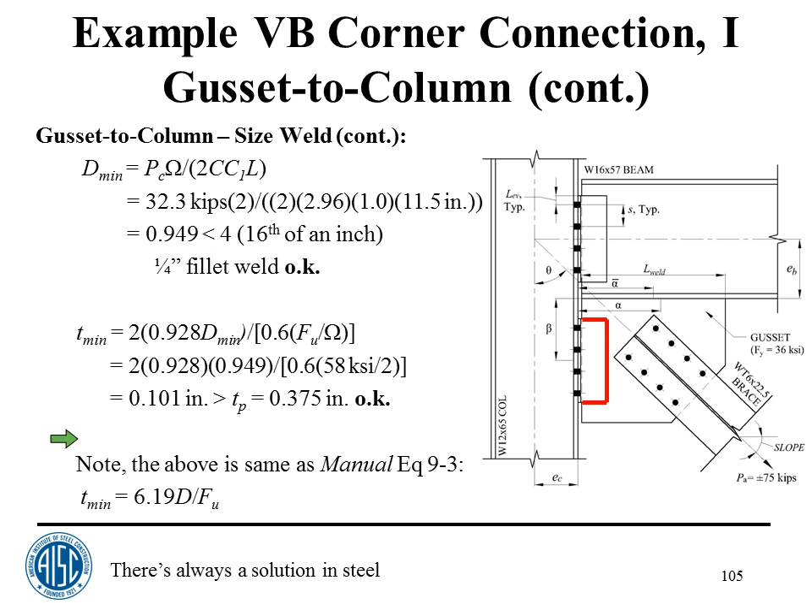T min is equal to 6.19 times the number of 16ths divided by the tensile strength of the material.

If, in fact, the T min was greater than the thickness of the plate, you would have to prorate the strength by the ratio of the thickness of the plate to the T min required. So your quarter-inch fillet weld might not be good for a quarter-inch fillet weld if you had too thin a plate. All of this is spelled out in the manual on how to do it.

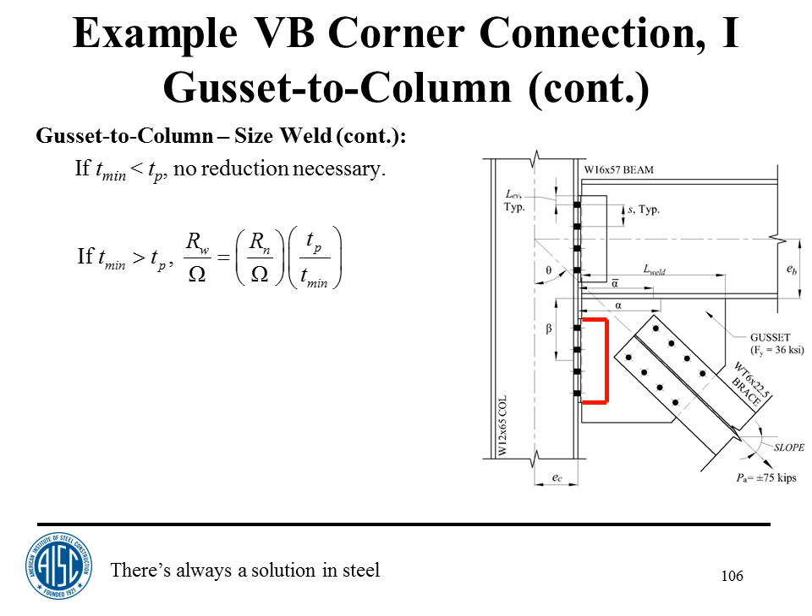All right, continuing. This is the next part of the design: the gusset to the beam. Will it ever end, right? We've done gusset to column, we've done brace to gusset, now we're doing gusset to beam. We've got one more after this yet to do. What do we have to do for this one?

We've got to check the weld size between the gusset and the beam. We have to check the gusset for shear and tension at the weld line. We have to check beam web yielding because we have a normal force on this particular joint, and we need to check for local beam web crippling because there'll be a normal force, possibly a compression on that edge.

All right, this is for the welds. This is just the nominal weld strength, 0.6 times 70 times the area of the weld. And this quantity in brackets is the strength increase factor, which you've seen before, if not in this session then in the previous one that Tom Murray did. If the angle between the loading and the longitudinal axis of the weld is 0, this factor is 1. But if the angle is 90, this factor is 1.5. Those are the two extremes.

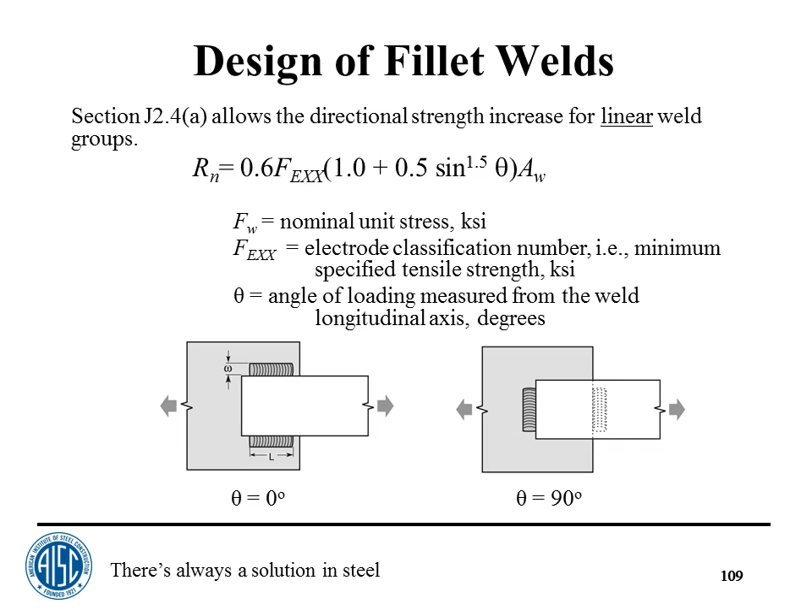One problem is that you can't just add these together if you have two of them in the same joint, which you've seen before. What you saw in the previous slide is more commonly shown, in ASD terms, as 0.928 times the strength increase factor times the number of 16ths times the length of the weld.

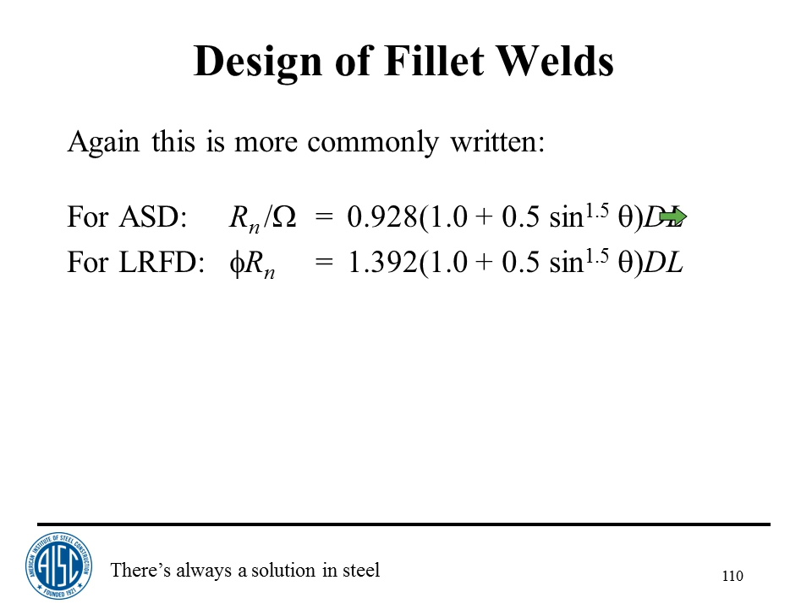And if this is the length of one weld, maybe you should have an N in here for the number of welds. LRFD 1.392.

So let's check the weld. We have a shear component. This X here is the horizontal component of the kips per inch of weld, the shear on this edge: 35.6 divided by 20 gives 1.78 kips per inch. We have two vertical, or normal, components. This is due to V sub V: 25.4 divided by 20 gives 1.27 kips per inch.

And then we have a bending component, one of the reasons this example was included, just to illustrate. M sub B is 25.4 kip-inches. The length of the weld is 20 squared in the denominator, times 4, which is the plastic section modulus, giving another component of 0.254 kips per inch.

So the peak stress would be the shear stress plus the maximum normal, giving me 2.34. And then the average is, say, the square root of shear plus peak, plus the square root of shear plus the minimum, the difference between the two vertical components, added together and take half.

This 1.25 here is a ductility factor that comes originally from work done by Ralph Richard about 25 years ago. It was 1.4 to start with, but Chris Hewitt, who was an AISC engineer for a while, felt that was overboard, a little overkill, and he and I wrote a paper, though he's the lead author. 1.25 was the value we came up with. This paper is 10 years old, 2004, AISC Engineering Journal.

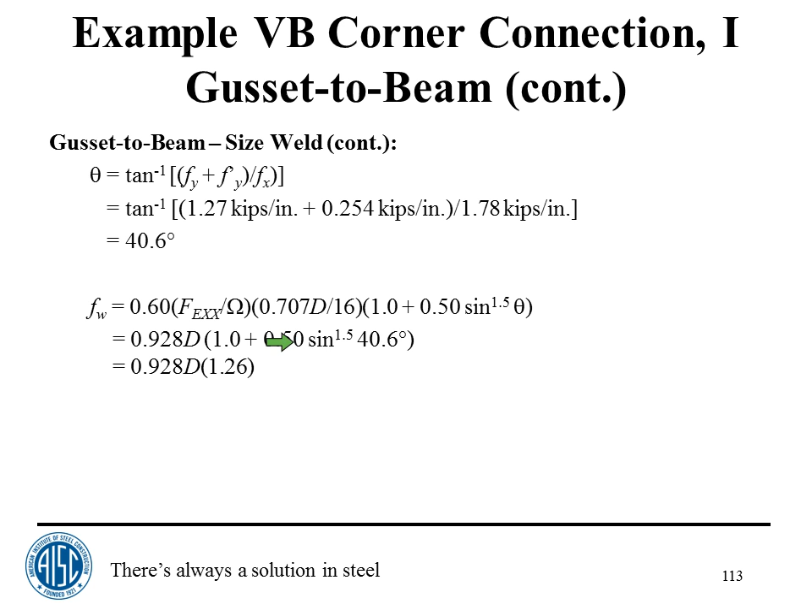In this particular case, the angle between the longitudinal axis of the weld and the resultant is 40.6 degrees. So the strength increase factor, 1 plus half the sine of 40.6 degrees to the 1.5 power, is 1.26. So we have 0.928 times 1.26 as the strength of the weld.

So looking at the peak and 1.25 times the average, take the bigger of the two and divide it by 0.928 times 1.26 and 2 welds, which gives me 1.18 sixteenths — which again, going the wrong way here, is less than 4, so the 1/4 inch fillet is okay. So correct your notes in that regard, it's obviously going the wrong way.

Also, you should check, and we should have checked before, that this 1/4 inch fillet satisfies the AISC minimum, and it does. The AISC minimum fillet weld for 3/8 plate or 3/8 angles is 1/4 of an inch.

So we need to check the gusset adjacent to the weld. This is basically checking the minimum thickness of the gusset for shear. This is the kips per inch of the gusset, and this is the shear yield strength of the gusset. Factor of safety 1.5 gives me 0.124 inches, kips per inch divided by KSI gives inches for the result. That's less than the 3/8.

I'm okay. Tension, likewise, the sum of the vertical components, the normal components, was 1.27 plus 0.254, divided by the tension yield strength, which is 36 over 1.67, about 21.6, gives me 0.071. Less than 3/8. We're okay there too.

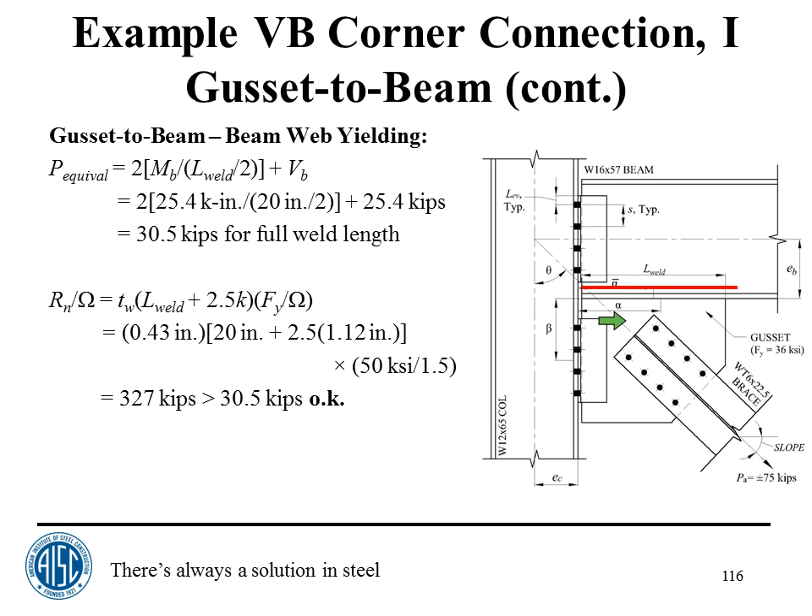So that is the required strength. What is the available strength? This is from the AISC spec: the contact length plus 2.5 times K, multiplied by the yield strength, multiplied by the thickness of the web, divided by the safety factor, gives me 327 kips, greater than 30.5. You might say, well, hell for good, but there are many cases, especially in seismic problems, where the forces acting on this interface are really, really high, so you can't say this is a throwaway limit state.

So where are we now? We're all the way up to the beam to column connection. We're looking at this one. And on this one we've got limit states to look at here. We've got to check the bolts, we've got to check prying of the angles in the column flanges, we've got to check bolt bearing and tear out, we've got to check gross and net section shear, block shear for the angles, block shear for the beam, and the angle welds.

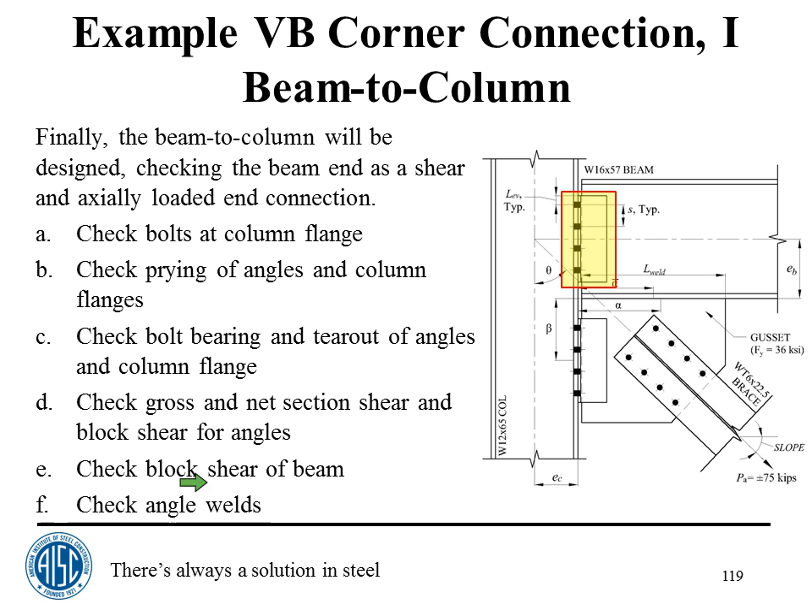We've checked all of those before. Well, we've got a discussion here. We need to do one thing that we haven't done before. We need to introduce the gravity shear, which we haven't talked about before, but this is a beam. It's probably got gravity loads on it. In this particular example, we're using half of UDL, which is about 41.9 kips.

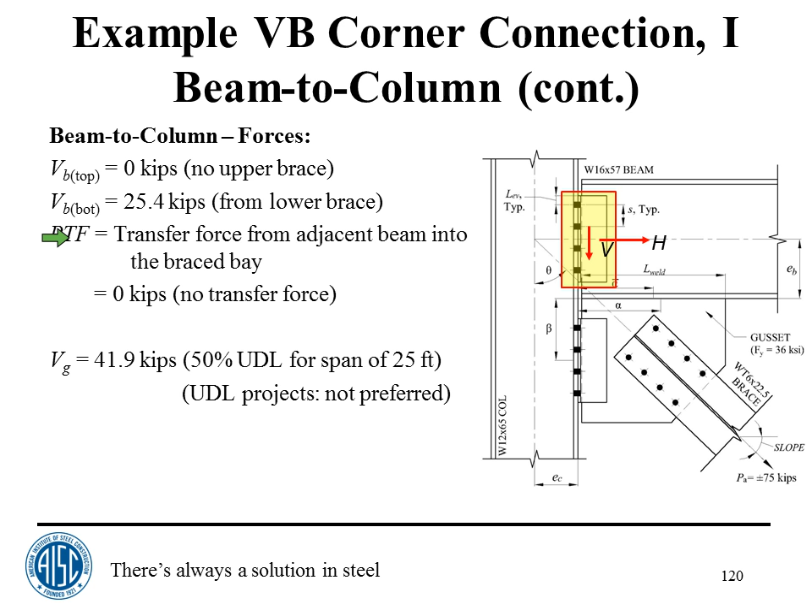You've also got some other things. This is a complicated connection. There's lots of different things that you might have to consider. They're not going to be considered all here tonight, but what we've got is a vertical force of 25.4. We've got no transfer force specified. We've got a gravity shear, 50% of UDL.

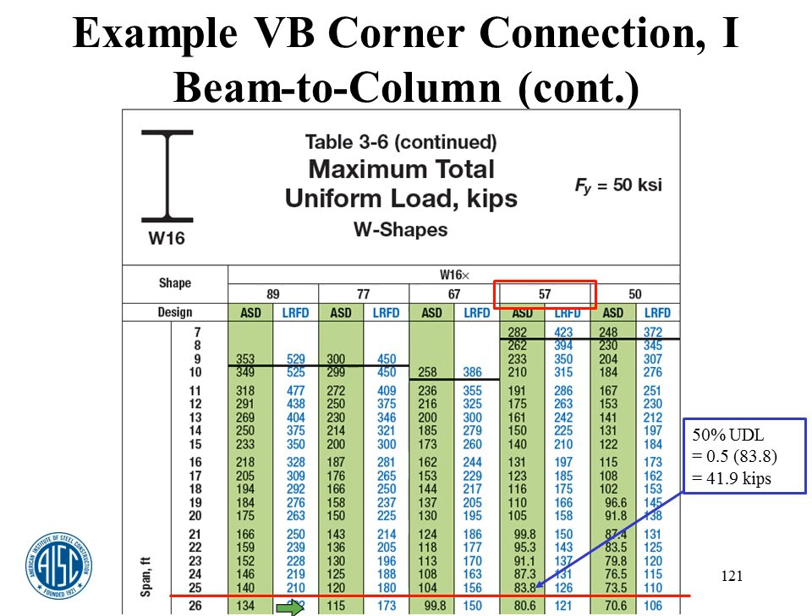The UDL from this table, 3-6, comes right from here. This is the total uniform load. Take half of it, put it on either end. That's where the 41.9 comes from.

We could have, for the vertical component, the gravity shear plus V sub b for the top, which is 0 in this case, plus V sub b for the bottom, which is 25.4, gives you 67.3. You should check the beam for this. The beam will be good for that, 67.3.

And then for the H, what are we going to do for H? Well, we could have the max of H sub C for the bottom, which is really all we've got in this case. We could have an H sub C for the top. We could have a transfer force. There's various ways to consider this, but in our particular case, it's 18.8.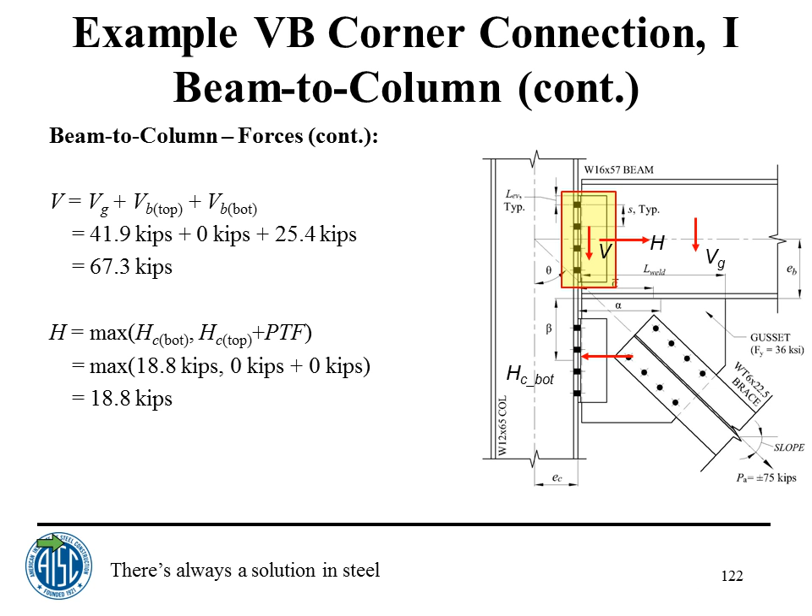But there are some considerations here that are worth thinking about. If you consider distortional forces, they will always reduce the H sub C that we have in here, these H sub C's, top and bottom. They'll always reduce those. But we're not considering those. So we could use H equals H sub C, that's the horizontal component from the bottom, and we could subtract from it what's on the top, plus the transfer force if we're checking an exact load case.

We could add the opposite H sub C if the braces are both in compression, which sometimes happens. Conservatively, the maximum V will be checked with H, but really, if we have a bottom brace like this and the brace is in compression, it's going to be pushing up, and it's going to be reducing the shear in here. There's all kinds of things you need to look at for this connection, and there's no way I can consider all of them right here.

This slide tries to point out that perhaps, if the exact load case is not known, you could take the maximum of H sub C for the bottom, or the sum of H sub C top plus PTF. So take this plus this, or that. Or if the exact load case is known, maybe take what's on the bottom, this, and subtract from it the sum of these two. That's a possibility.

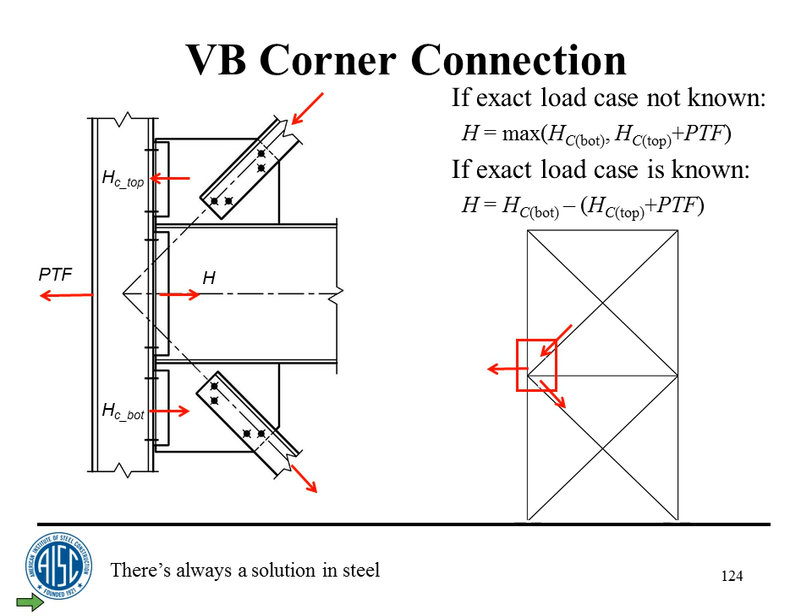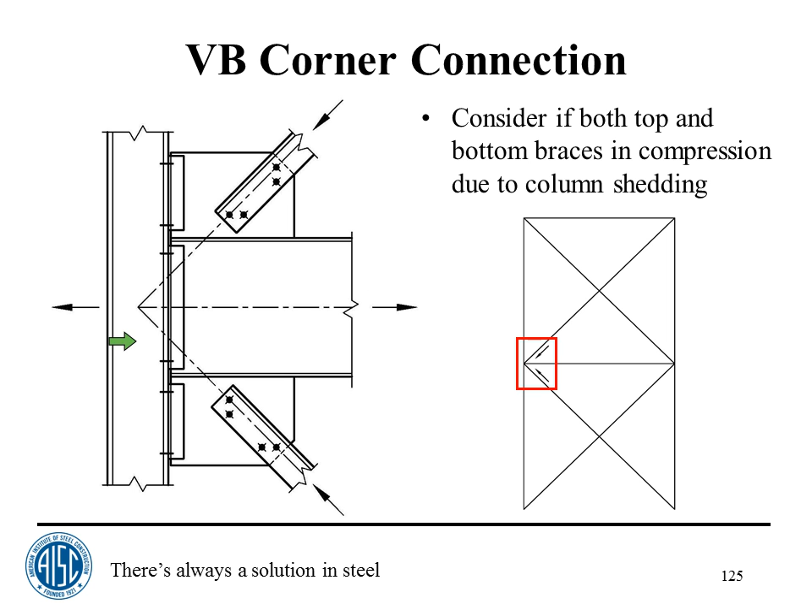But anyway, in our particular case, we have a simple case where we just have 18.8 kips here. Sometimes, because of what's called column shedding, you could have a small lateral force here, but a really high gravity load in this column, and the column will shed load to the brace, in which case you could have both braces in compression.

Anyway, there's all kinds of things that you need to consider here.

The beam to column bolts, this is one of the many limit states. All of them will be listed here in your slides between here and 159, but we are not going to do them tonight. They're all in your handout, so you can do every one of them yourselves. So let's skip to 159.

At 159, the only thing here is block shear again, but we've got block shear now for tension, for an axial force on this thing. All of these parameters in here are exactly what we did before, but a piece of the beam, if the horizontal force H sub C, or the transfer force, or all that stuff we just talked about gives a tension on this, you could tear out that piece. And so you need to consider that, you need to consider block shear for axial.

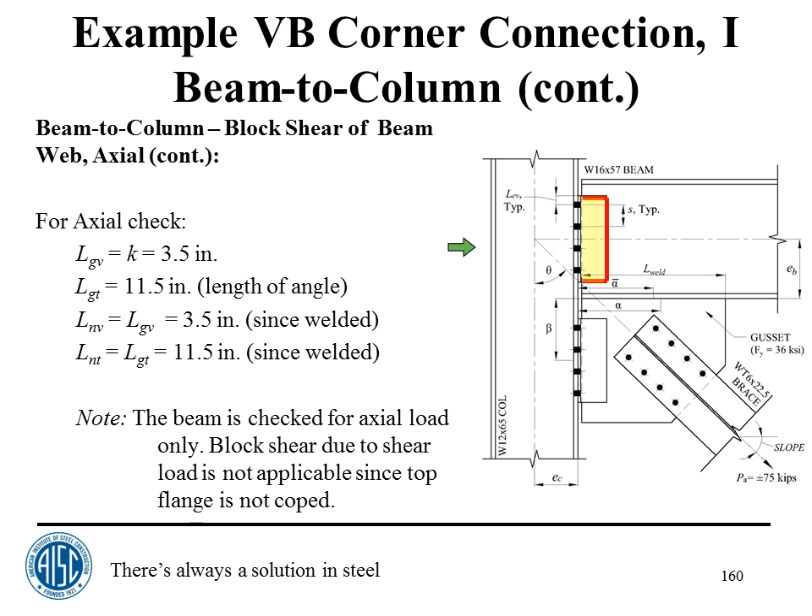And since there are no holes, we've already gone through this, the lengths for gross and net are exactly the same. Note that we're saying here that block shear is checked for axial load only. Block shear is not checked for the vertical components here because the beam isn't coped. In order for this to fail in block shear, you need to rip out the top flange, and we don't have a limit state for that yet. Perhaps there should be one, but whatever it is, it's not block shear. So right now, in all of the AISC publications, block shear is not checked if the beam is not coped.

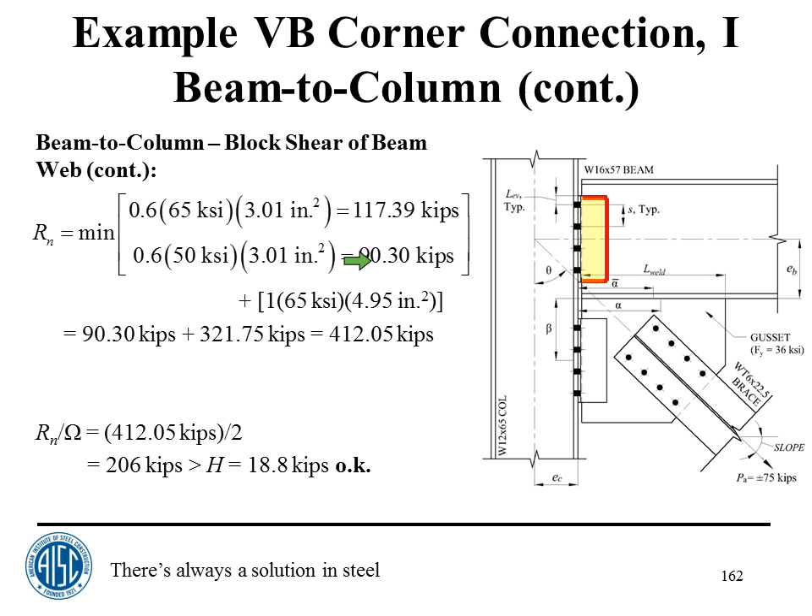Anyway, going through this, which we've done before, you calculate the areas that we have here, and you can calculate then the block shear strength, just like we've done before. This is shear fracture, this is shear yielding, we take the smaller of the two and we add to it tension fracture, which is 321 plus 90 gives me 412, gives me 206 when I divide it by the factor of safety. And then the rest of this, I believe we've done all of these before.

And so we'll skip to slide 168. And 168, really, we're finished. You've got all of the limit states that you need to consider for all four parts of this connection. We've done at least one of them in every situation here. Now we're just saying, if either the gusset to column connection or the beam to column connection cannot be made to work, if you've got a problem,

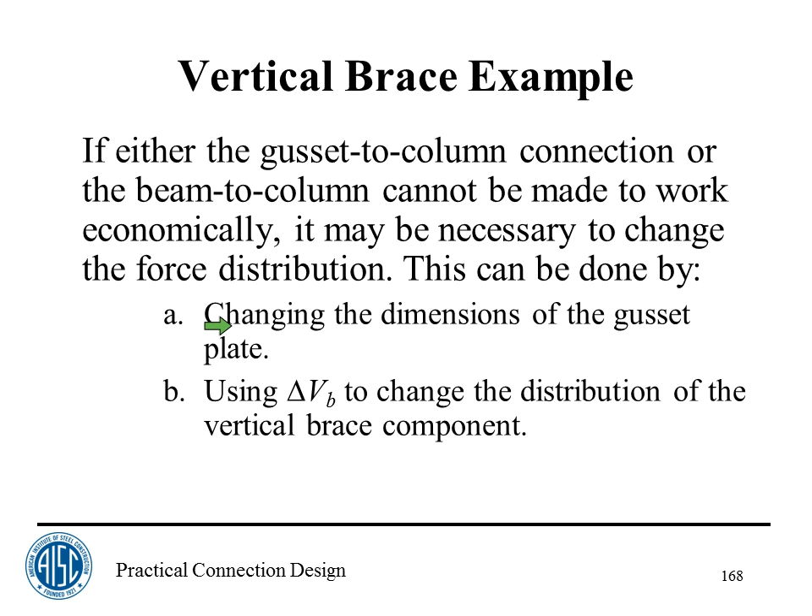economically maybe, it may be necessary to change the force distribution. Perhaps you want to use a delta V sub b, which was special case 2. That's a possibility. Or maybe you want to change the dimensions of the gusset, make it bigger. The gusset that we picked is pretty compact, it could be made bigger to eliminate problems. We're saying here for economic connections, and I think you saw this in the first or second session, use the uniform force method.

Certainly there are other methods out there that you can use, but I don't think you'll come up with a more economic design if you do that, and I don't think you'll get one that's closer to what I can call, quote unquote, the true solution, the one that satisfies equilibrium, limit states, and compatibility.

Use decent-sized columns. Don't use really tiny beams when you have bracing connections. When you do your computer analysis, the beam might not even know that there's any force coming to it by the brace, because the brace connects basically to a node. So you end up maybe with a 10 by 12 or something like that with a brace that's got 400 kips in it. There's no way you're going to make that work, not without doublers, haunches, and everything else. So consider the fact that if you've got a brace with a significant load in it, you ought to have a fairly decent beam.

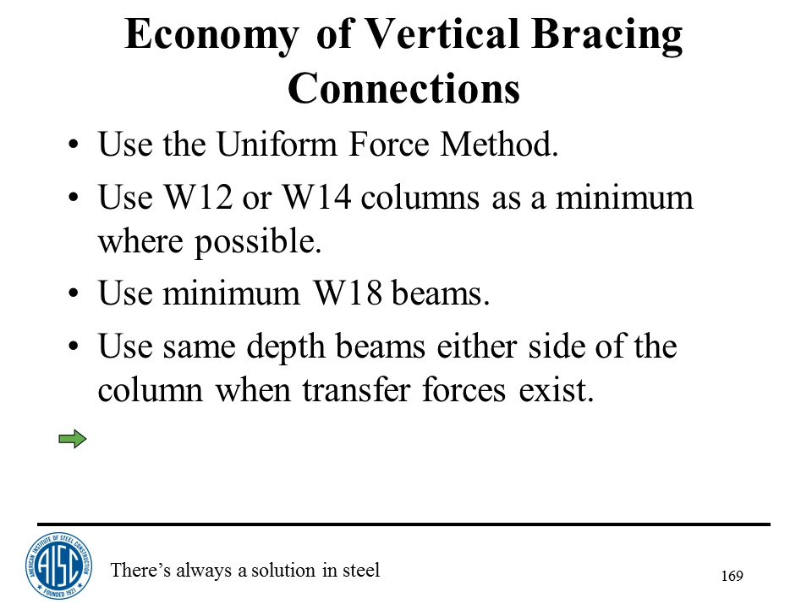Use the same depth beams on either side of the column to avoid any eccentricities relative to transfer forces. Consider net section capacity when picking your braces. And then the last thing, which is almost never done: provide the actual loads if you can. Maybe give the connection designer a series of load cases so that he or she can pick the ones that control, rather than using envelope loads.

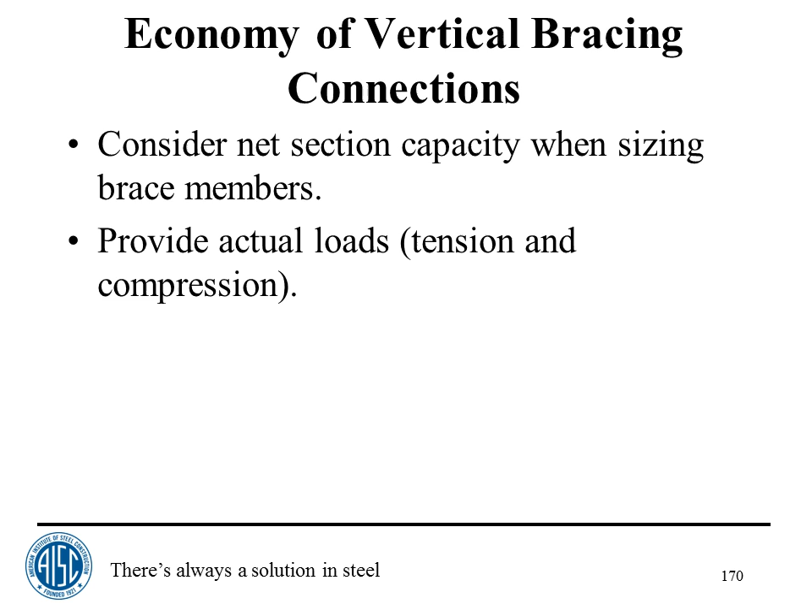For summary, we've basically talked about all this. We've done a corner connection here. This is sort of non-seismic, the kind of ordinary design without any special detailing requirements. We'll see a lot of detailing requirements next week.

We began the example with the brace-to-gusset connection because we need to do that first to size the gusset. The gusset dimensions were determined based on the brace-to-gusset connection. The gusset-to-column connection, including prying action, was checked, followed by the gusset-to-beam connection, and finally the beam-to-column connection. The beam-column connection is the worst of the lot because you've got top and bottom braces possibly, transfer forces, distortional forces, column shedding - all kinds of things you might have to consider.

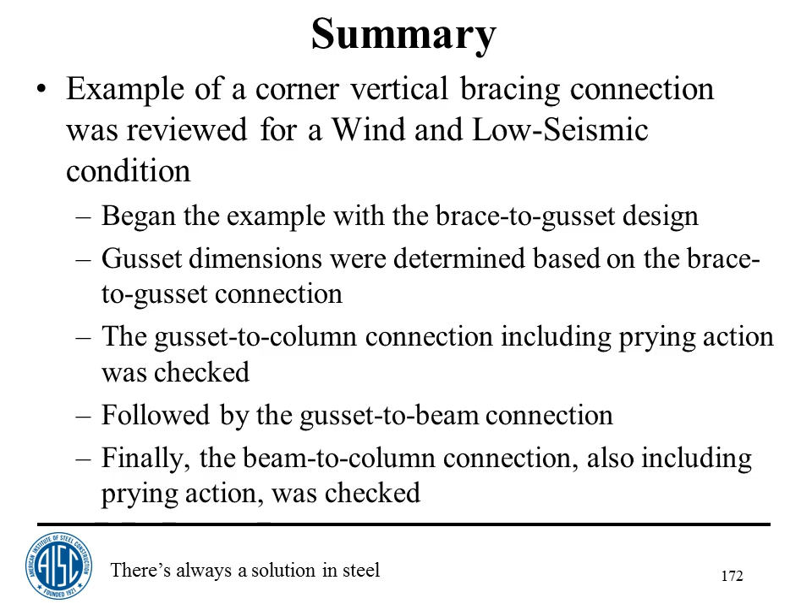And with that, my time is about up, and I thank you for your attention.

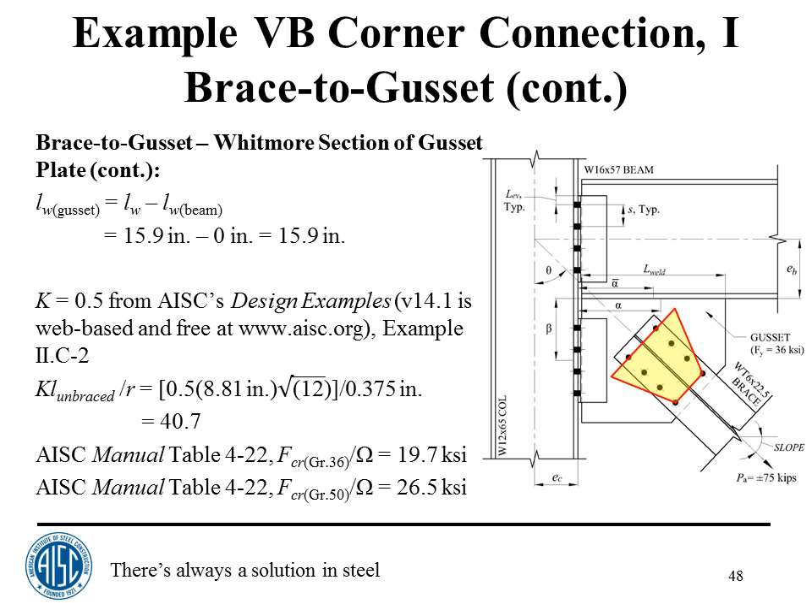Okay, I'm going to move forward to slide 96. This is looking at checking block shear of the gusset. So the question is how do you have block shear with tension in the brace as is shown?

It seems that V sub C is upward to the beam. It would be, but remember that the brace can be plus or minus. The 75 can be plus or minus, so the brace could actually be pushing up, and the gusset to column connection could be pushing down instead of up.

So unless I know that the brace force, P sub A here, is always plus 75, if it were always plus 75, then I wouldn't have to check this limit state. But I'd say 9 times out of 10, or 99 times out of 100, we're given that the connection designer is given a plus or minus, or plus something and minus something. So I always check the worst case.

This was addressed on the slides to some extent, that if, for instance, the brace is in compression, the V sub B between the gusset and the beam is pushing up, which is actually resisting the V sub G, the gravity shear. So you could look at the difference between the two.